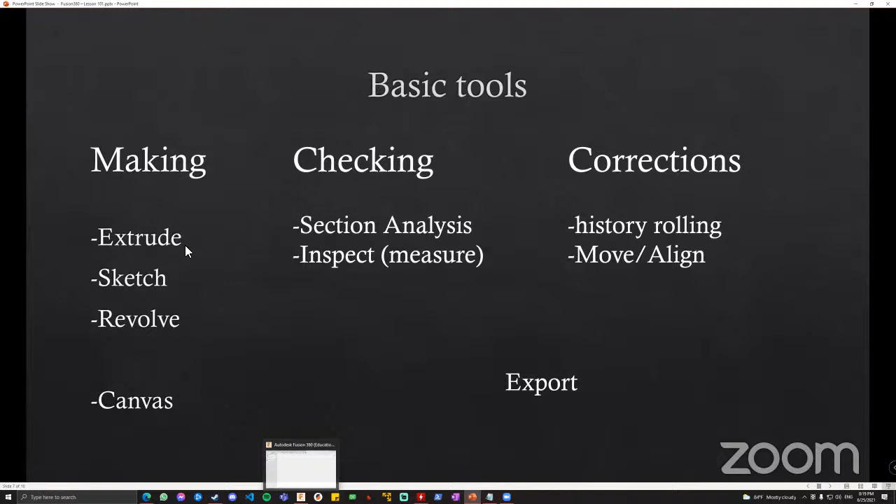A bit into the more practical side of the presentation, the basic tools. So for using Fusion 360, we have for the making part, the Extrude, the Sketch, and the Revolve.

Let me find, there we go. So you have the Extrude, the Sketch, and the Revolve, and we're going to look at all three of them. Sketch means you are making a two-dimensional design. And this is where it actually counts a lot if you've made your design on paper.

And I am actually going to download a design in a second. For this presentation, I'm going to present how to make a basic skeletal looking finger. And I just made some really simple sketches on paper. You might not even be able to understand what they're all about, but the only thing that really matters is that I understand them.

Let's see, we have to find a canvas. And this is the side note of making: use plenty of canvases. If you have drawing on paper, you can put the drawing in here as well. You can insert them from your computer, and I just downloaded this.

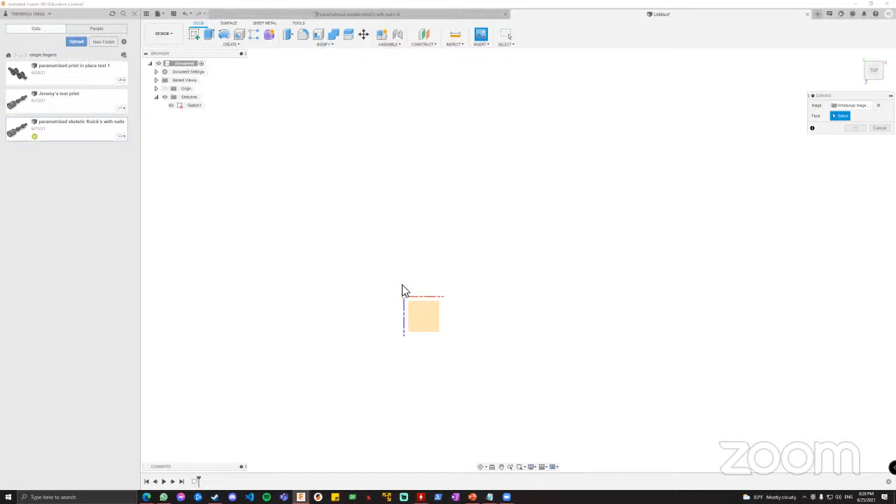Let's say I'm putting this on this face. And I need it to be 180 degrees, so it's face up.

Right, so on top of this canvas, we're gonna use the sketch environment. So to start the sketch environment, you can start it from here, or you can press L, which will automatically start the sketch environment, and it will ask you to select a plane where you want to sketch your things. And if you're using L, it will automatically select the line tool.

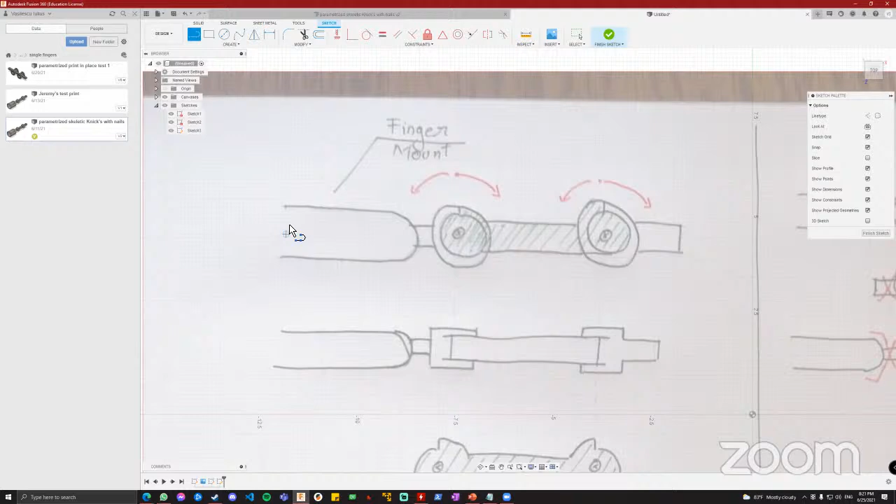Now, there are a bunch of tools over here, and I really encourage you to explore all of them. Some of them are advanced, some of them are not. In our case, we're not going to be using this picture right here. We just want to create a very simple rectangle. We're going to click Finish Sketch, and that's the sketch so far.

Now, in order to make this a three-dimensional object, we're going to click on Extrude. And then we can pull on the arrow to make it as big as we want. You can also type in here the exact measurements that you would like for your thing.

And with Control Z, you can undo the last movement, and you can undo all of the movements that you've made so far. And that is the extrude and the sketch command. With the extrude and the sketch, in the beginning, you will probably be able to make about 90% of your designs easily. Now, the revolve command is functioning.

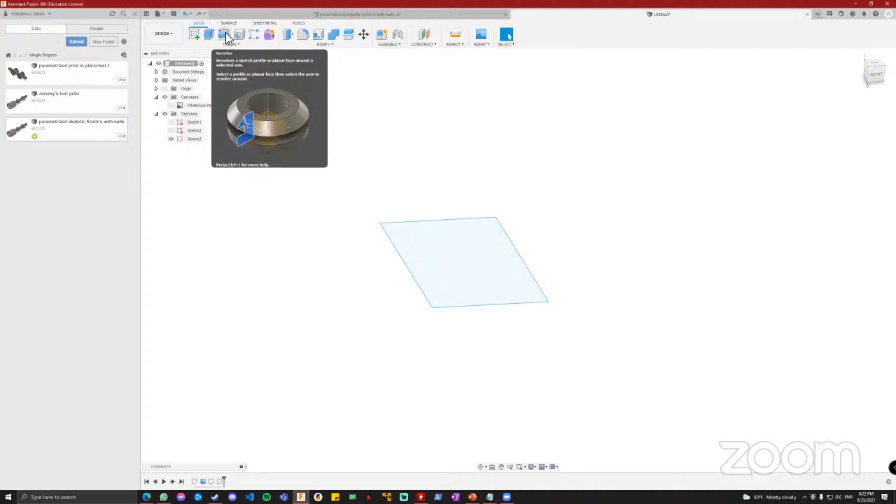It's very similar to the extrude in the sense that it does extrude, but it does require an axis of rotation. And here, for example, I have selected this rectangle with the revolve command, and I'm going to select as the axis this line right here. And as you can see, it rotates the entire profile 360 degrees. Now, if I don't want the full rotation, I can also select a specific angle that I want this at.

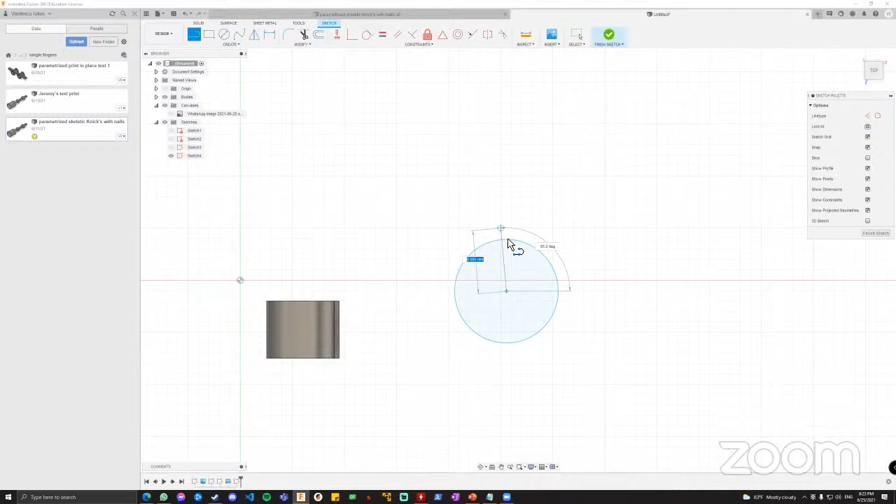Let's say I want to make a Pac-Man right here. If, for example, you want to make a sphere, you would have to draw a circle and then draw its diameter so that you can revolve one side of the circle around the diameter 360 degrees, like so. And now you have a three-dimensional Pac-Man.

Those are your basic tools, and I will be showcasing them a bit more in a minute when we're actually going to have a proper demo for the skeletal finger.

Now for the checkup tools. Once you have finished your designs, you will want to make sure of how the design looks inside, and how the design might be measuring from one point to another.

In order to get the section analysis, which is really common to be requested in engineering, you would go to Inspect, then down here you have the section analysis, and select a plane. As you can see, it will cut all of the objects in the scene and show you the section view. You can also angle the section view, and use the arrows to move about.

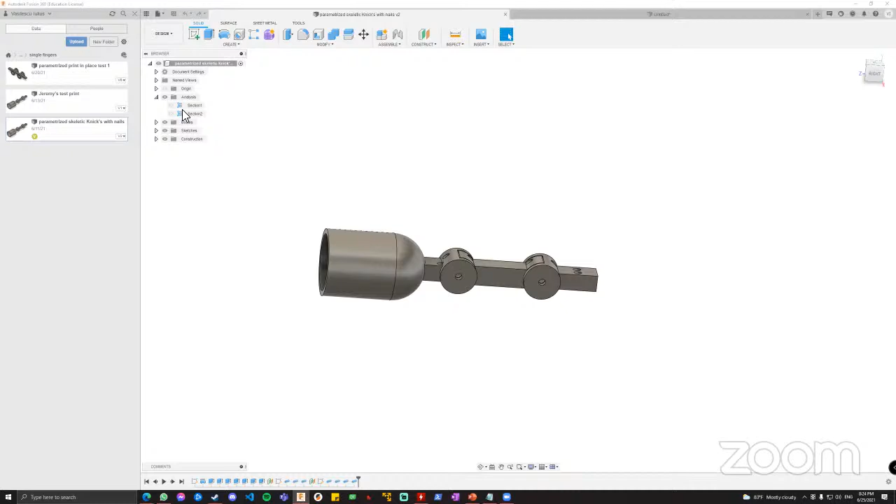This is really relevant where you have designs that intersect a lot of components. For example, on this finger that we're going to be building in a minute, I have this section view that shows how the components actually fit together, and you have different colors for each of the components.

Now, the other thing that's really useful for checking your design is the inspect functionality. You can turn off the analysis from over here. For the inspect functionality, you have this measure tool, which can also be called from the keyboard by pressing I.

You can select, let's say I want to see the diameter or the radius, so I click on the outside edge of the circle. That's going to give me the diameter, the radius, and anything else, including, for example, the length. I have no idea why it gives me the length.

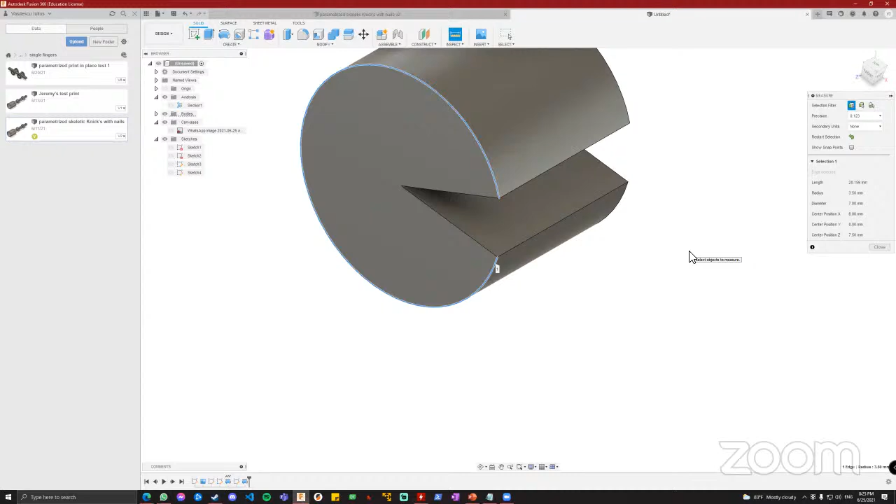If I want to see, for example, the distance from this side to this side, it has some visual feedback, and it will also show me selection 1 area, selection 2 area, and you have the distance and the angle between the two surfaces.

The measurement functionality has a bunch of different modes of operation. For example, you can select faces that are not exactly aligned, and you will get something like this. Or you can select faces and try to get the angle between two different faces, and there you go - you can see it's 40 degrees apparently. All kinds of stuff like that, which is really useful when you're trying to make something that you're 3D printing in the real world.

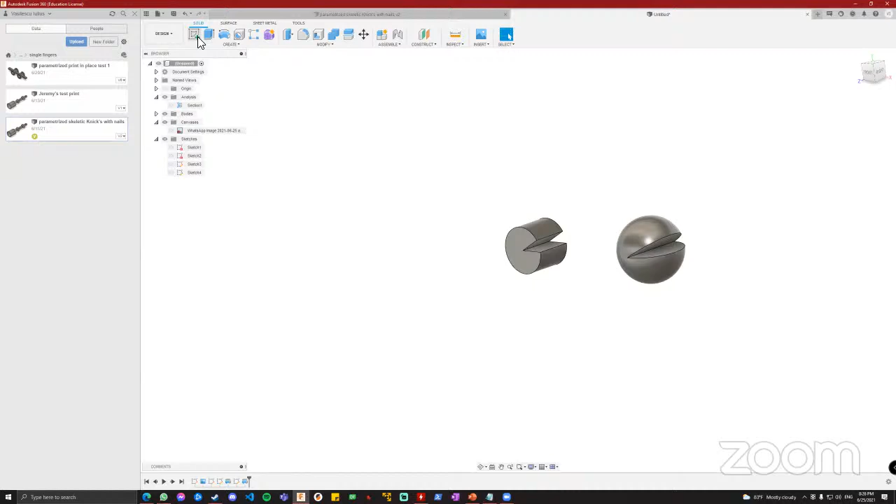Now, corrections. Let's say you have checked your design and something is bad with it. If you've noticed, for the time that we've played in here, there have been some small things popping up. This is called design history, and by default this is on in Fusion.

Now you can Control Z to remove some of them, but you can also roll back the history. For example, if I roll back the history, then I can edit this part, and it will automatically compute the entirety of the history.

This is not relevant in the beginning, but it will become relevant as you start gaining experience and you start making objects based on other objects.

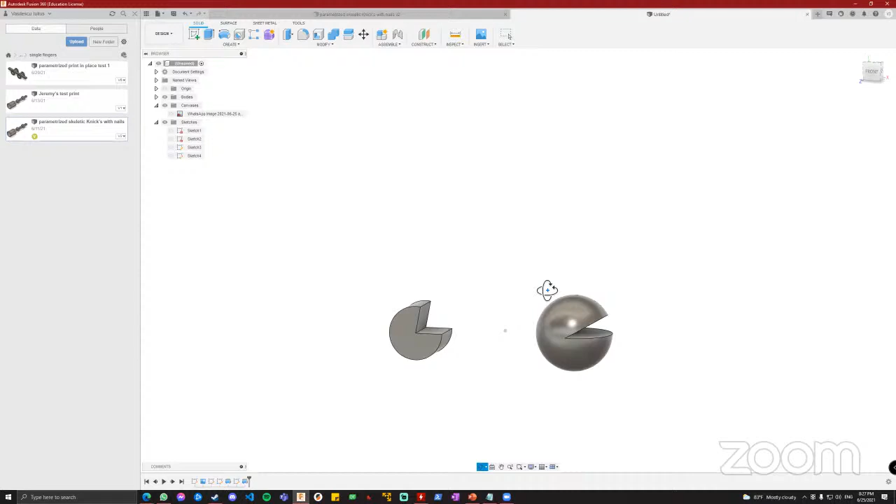Another important feature is you can double click a sketch from the list of sketches in order to edit it, and it will also jump the design history to that point. So for example, if we want to edit this one, we don't have to go all the way back - we can also double click on it, and now we can start adjusting it.

For example, we can make it much longer and a bit more slim. If I click finish sketch, there you have it - it automatically applies the changes to the entire design history.

You can also make the bodies invisible. You can select which bodies are visible, and which sketches are visible. Really, you'll get to your own preferences in that part. Personally, I prefer to work with only one body and only one sketch at any given time, but I've seen people working with 50 sketches.

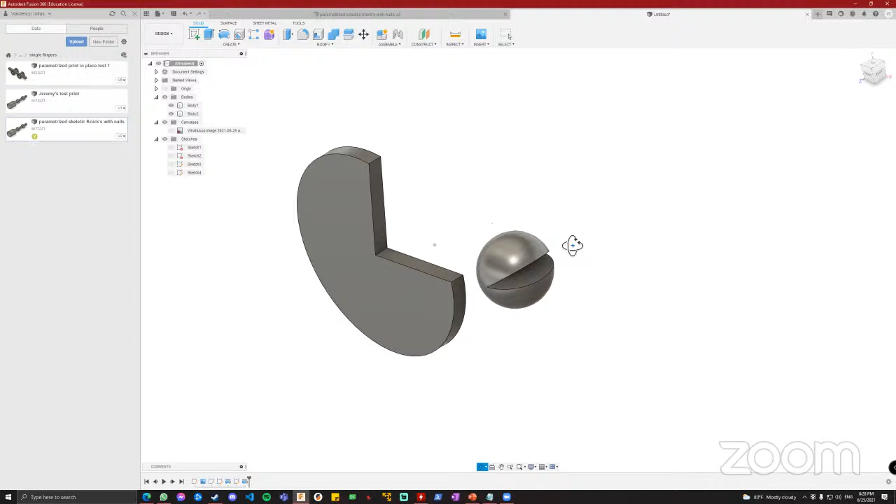Another type of correction is the movement and alignment. Now you might have two discs like this - so I hit E for extrude, and I'm going to make another body. Now I have two discs, but I want to have a small distance between them. I don't want them to be completely flush with each other.

So I can select the body, right click and move. I can also press M on the keyboard, and now I have the entire move functionality. This has a bunch of different modes of operation, and each of them has their own use case, but the default one is this one with the arrows and the angles.

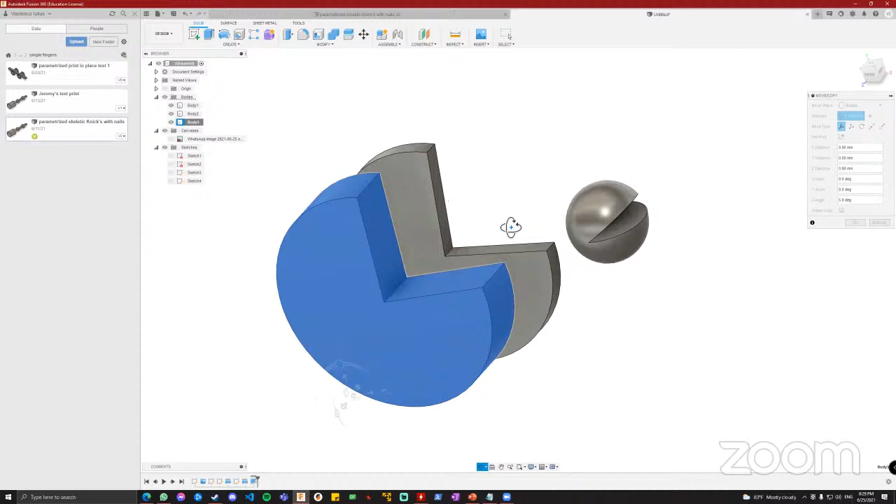Do keep in mind that when you're trying to angle something, it will angle it by this point. So if, for example, I'm selecting another point over here, it's going to rotate it about that point. For that, you have to select the very center of the body.

And you can also select stuff from a sketch - for example, I can also select this point, if I'm not mistaken, not even sure how to do that. If you find this menu to be too much, you can also select just the translation menu or just the rotation menu.

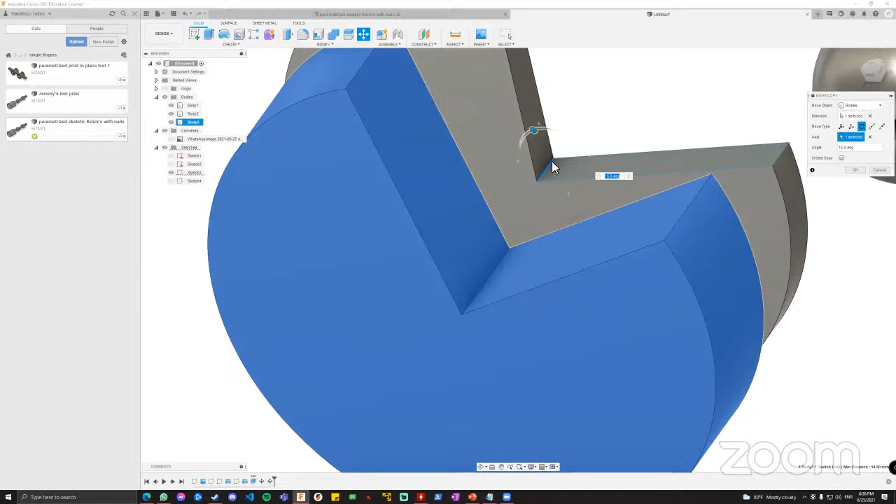For the rotation menu, it's not 3-axis, so it's not all 3 axes around the random given point. You have to select an axis of rotation, so this is for very specific rotations. There you have the axis of rotation from the previous sketch. The axis of rotation doesn't have to be from a sketch, it can also be from a given object, so it can also be this part. And now I'm rotating around its own center.

And that's pretty much all the basic tools that you're going to be using in your first probably 50 hours.

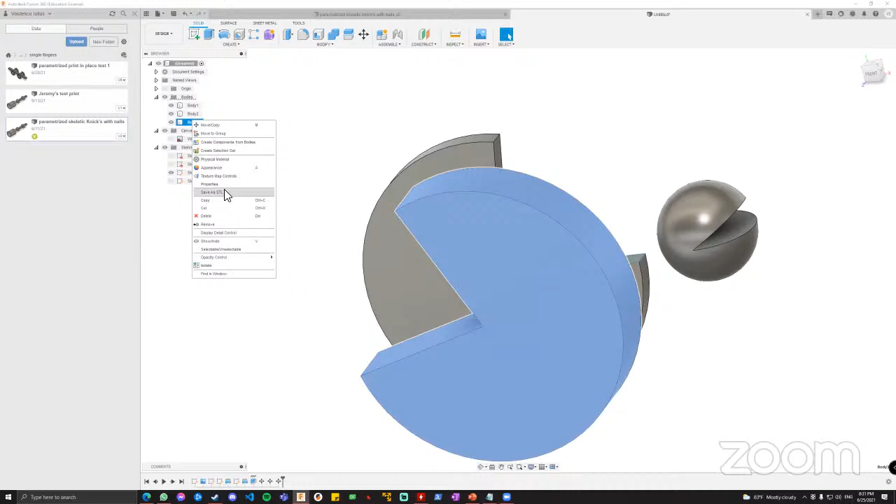The other thing that's important for using this in the e-NABLE community is how to export this to a 3D printer. Fusion 360 does have some embedded connections with Ultimaker, but personally I don't have Ultimaker, so I didn't bother with them. You can select one of the bodies, right-click on them, save as STL, and select your refinement from over here in case you want a custom refinement or want the file to be really small. It will ask you where you want to save the file, and from there you can directly import it into your preferred 3D printing environment.

So those are the basic tools. Now for a bit of a more proper demo, we're gonna be running on this depending on time. I can see I'm already halfway there, so we're probably not gonna be able to run through all of the approaches.

But we're gonna be redesigning this finger based on this canvas right here. To remove everything but the canvas, I'm gonna roll back the history, right click on it, and delete all features after the history marker.

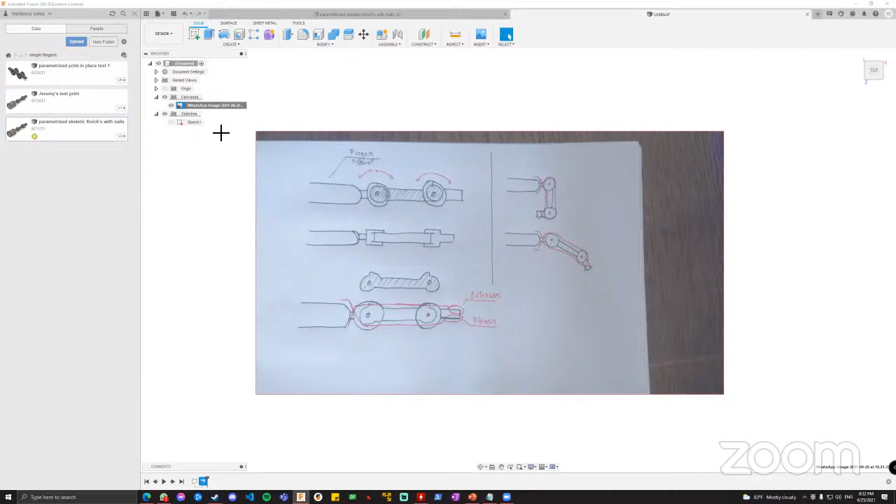In order to make the canvas millimetrically precise, you can right click on it and click calibrate. For example, I have the diameter of this hole about 3 millimeters. And now when you're doing sketches based on this, your entire thing will be scaled up.

A quick word about the most basic approaches for each skill set. At the beginner level, you can have lots of shapes and sketches, and all you care about in the beginning of using Fusion is getting the job done. You don't care how many shapes and sketches there are. Once you get more experience, you'll start wanting to use fewer sketches, because you'll want to edit those sketches in the timeline to edit the entire design.

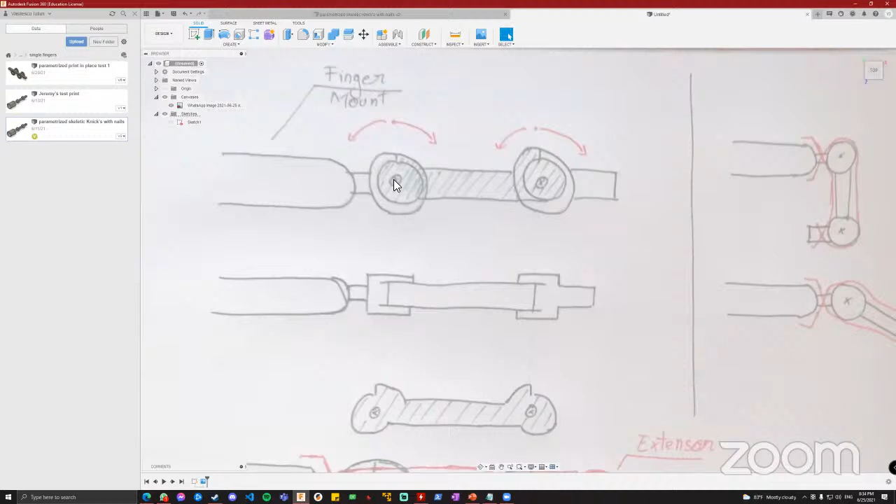On an expert or more advanced level, you would start using parametric designing, which basically means using parameters, predefined variables that you're going to be using in your designing. For example, I can have a parameter that specifies that all the holes in my design will be exactly 3 millimeters in diameter, and that's called a parameter.

Just to showcase it, I can click on modify, change parameters, and create exactly that variable, hole diameter, and set it to 3 millimeters. You can have however many parameters you want. You can also create these parameters afterwards, and you'll have to find them in the history in order to edit them.

Then you have the professional level, which is not just parametric design, it's also printer-friendly design. That's more regarding the actual manufacturing process.

So for everybody that's either on Zoom or on YouTube, which level do you want to see approached right now? For the people still watching, that is. You know, I'm interested in— oh, looks like we've got beginner. So absolute beginner. I'm also curious how it ties into the printers, that would probably be a discussion for where Jeremy could jump in, so maybe we can end with that. That would be wonderful, to maybe even just walk through it. Looks like Susanna is asking about amateur. So is it possible to maybe give us a little tour?

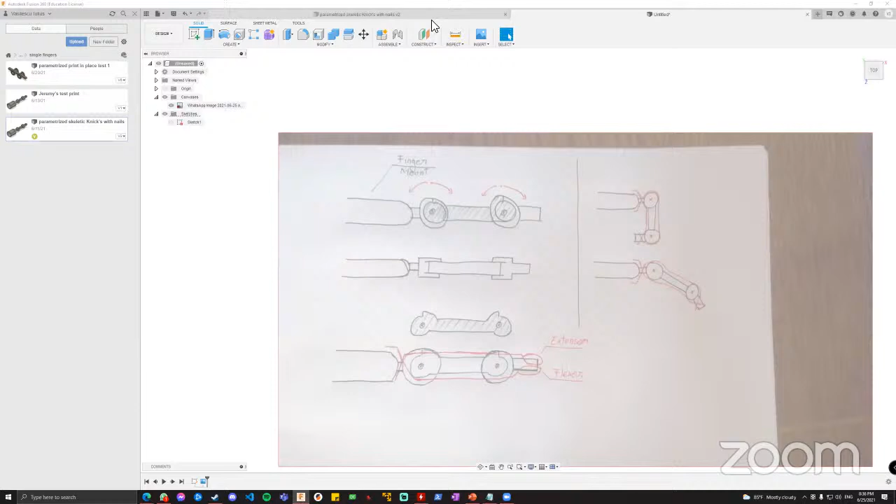We have this finger, and I have it in real life beside me because I made a bunch of models of this. This is an actual finger that we're currently developing with the e-NABLE collaborative team. Granted, not this one—this one has way too many holes.

So in my imagination, and as you can see on the sketches here, we can have three objects: the finger mount, which is this part; then the middle phalanx, something like that; and then the tip. Theoretically, from what I thought, you can have the wires connected from the first body going through the second body and tying off on the end. We're not going to care about the wires right now—we only care about making the bodies first, because the wires can be added later.

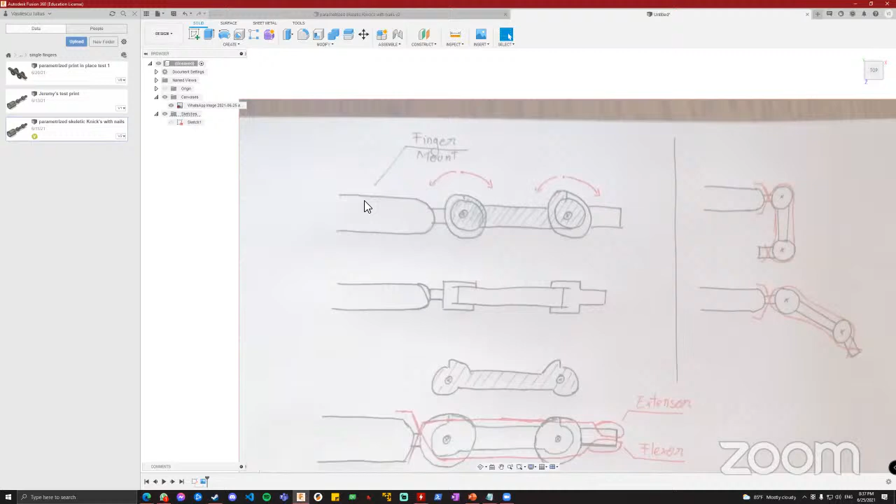So in order to have a finger mount right here, the way I thought it was, firstly creating a sketch over here, creating a massive axis so that everything will be symmetrical on this axis.

Now we're gonna have a bunch of lines over here with, let's say, 2 millimeters of width. And then a bunch more lines over here. That's the basic finger holder. We're going to revolve this around this axis, and now you have something to put your finger in, which sounds terribly wrong.

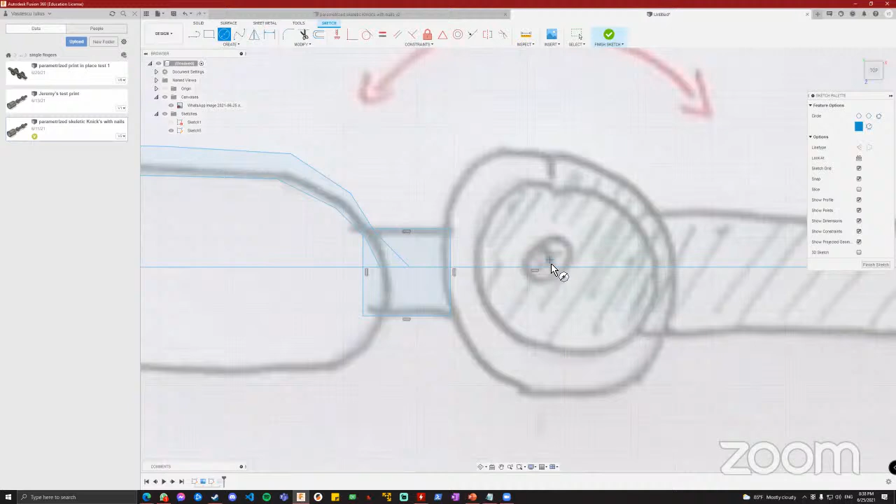We're going to go ahead and edit the sketch from over here, simply because we could create another sketch, but there's no point in it right now. And for the connection right here, we're going to use a rectangle. The hotkey on the keyboard is R, and the hotkey for a circle is C, which you can also see right here. Let's say it's somewhere over here. We want to use that parameter.

So we're going to start typing 'hole,' and there you have it, hole diameter, and hit enter. As you can see, it's not a dimension, it's an fx. So that's a function. Functions can be a lot of things, but that's a topic for a more advanced session.

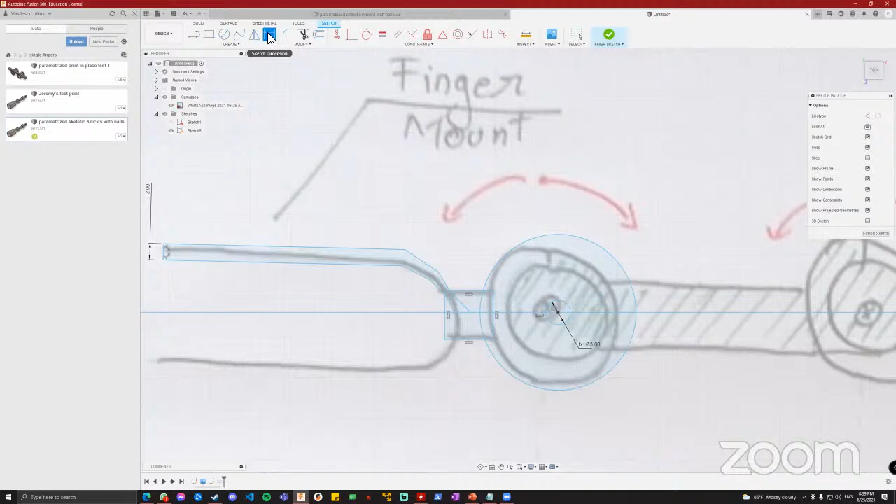Also, if you have a line that you would like to make smaller or bigger, you can either A, drag your points around, or B, hit D for dimension, which you have on the top right here, and put a dimension on it, and then you can write a different dimension. Do keep in mind that the blue lines can all be moved around.

However, let's see, the origin of the file is right here. So if we create a line right here, this is poorly defined, and you can see it as blue. If, however, we start defining things about it, for example, we can put a dimension on it. So that's exactly 17 centimeters.

And then we can put the other dimension on it, which is going to be 10 millimeters. Oh yeah, we're in millimeters, not centimeters. You can see the line just became black. That's because this is defined well enough that you cannot move the points around.

So Alexander, this is Connie. Sorry to interrupt. Do you always fully constrain your sketches, or do you leave them?

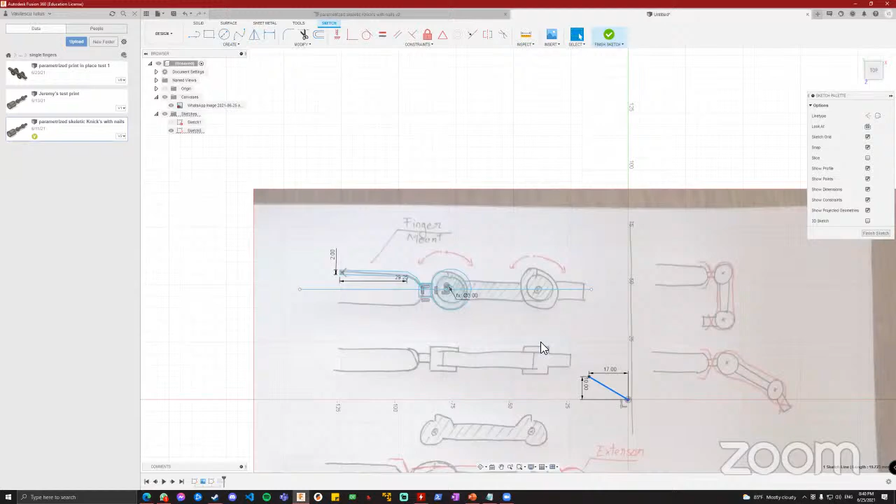If you have the time and the application, always try to fully constrain your designs. Okay, perfect, thanks. Something that's not constrained would mean that it can be moved around.

And when you start moving things around, when you have very complex sketches, see right here, I've moved the circle, but apparently the circle is constrained to the line, and now I've messed up the entire design. That's why you prefer to have these things constrained.

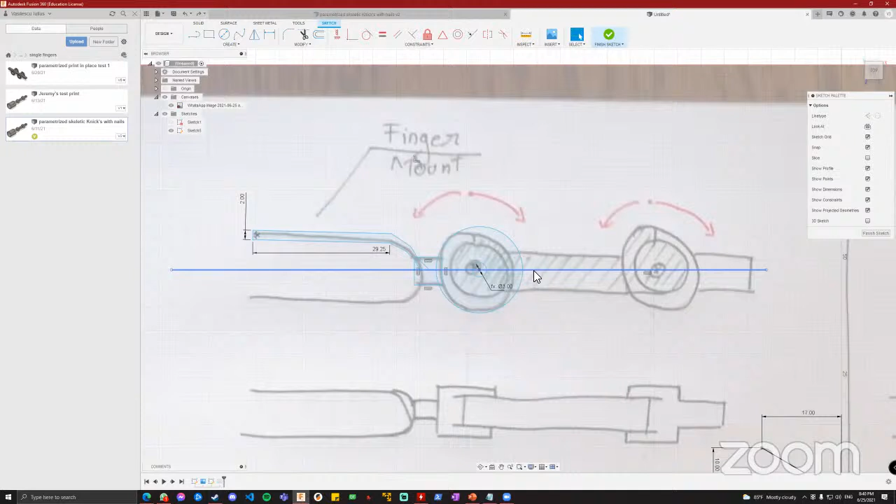There is also, for advanced users, you can select parts of the sketch and hit on this fix and unfix, and this becomes unmovable. It's very similar to having a constrained line. But again, that's for more advanced users.

Right, so we have the basic thing, we have the basic finger mount. If we select to view the old sketch and make this body completely invisible, we can select these things to go from left to right. We're going to select two sides.

We can actually select symmetric, so it's going to be exactly 5 millimeters on each, on both sides. We want to see this object. And when you see that the extrusion is red, it means it's set up to cut. If we hit enter, it's going to cut that profile into your old objects.

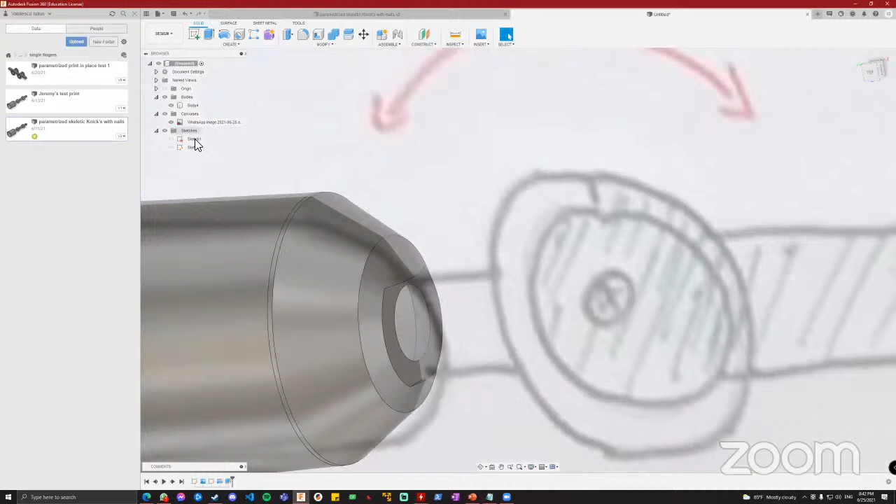As you can see, it literally cut the tip off right here. Now, if you want to edit that, double click on the extrusion in the timeline and we can select it to join. You can also select to make a new body or have just the intersection right here, which would be the tip. But for our purposes, we want this to be joined.

So now without the canvas, we have the finger mount and the connection. Going back to the sketch.

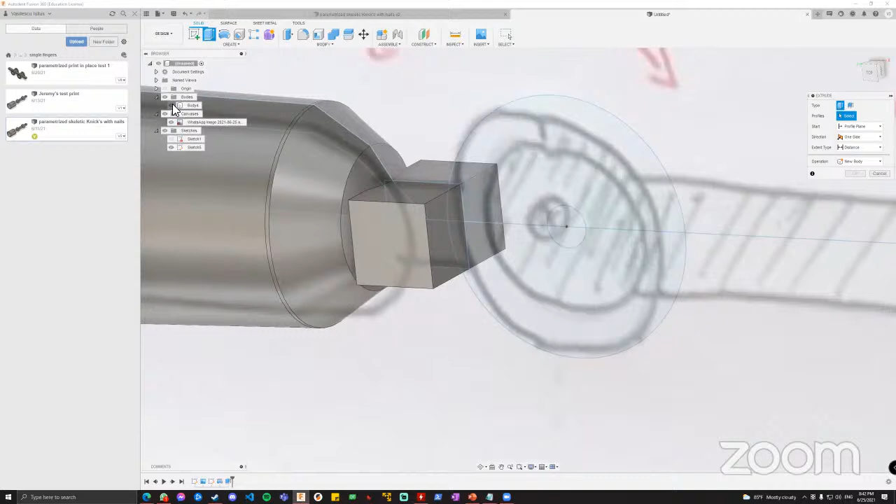We want these two planes. So we have this object and we have these two side parts of the joint, and we want to create those. Now we're going to use extrude again for this, but with an offset. I have my body right here and I have to guess pretty much the offset, because Fusion doesn't have a proper enough setting for this yet.

Let's say I want this to be joined and I want the offset to be 3 millimeters, so it's moving the entire thing in the direction of the extrusion. And since it's already offset by 3 millimeters, I want the actual extrusion to be 2 millimeters so that it's flush.

And you have half of it, and you can also do the other half. Now in order to do the other half, because I'm lazy and don't want to make another extrusion, I can also use mirror. Mirror, as the term says, will mirror whatever you select. You can mirror faces, bodies, features, or components.

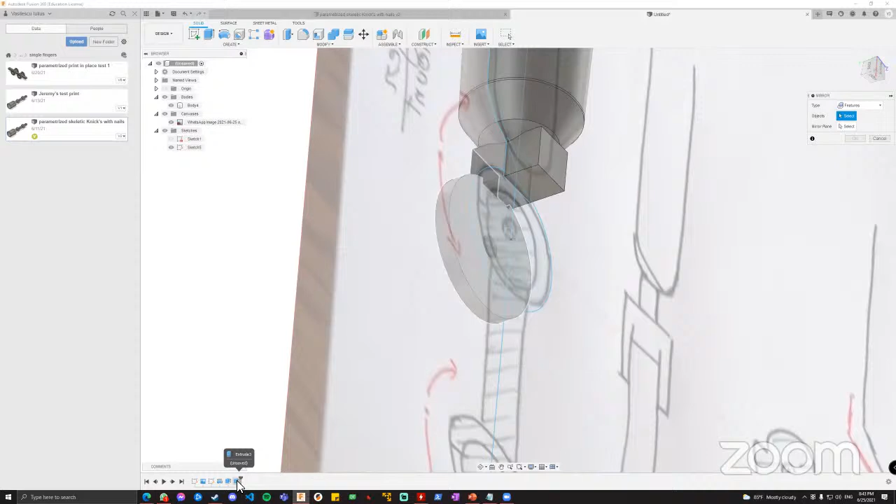Features are things that are right here in the timeline. I'm going to select features, and select the last extrusion. The mirror plane is going to be the sketch, so it's going to be this mirror plane. And the compute option, we don't really care about that.

So if we remove the canvas, there you have the joint connected to the first body. Now if we go back to the original sketch, this is rotated upside down. It does happen every now and again.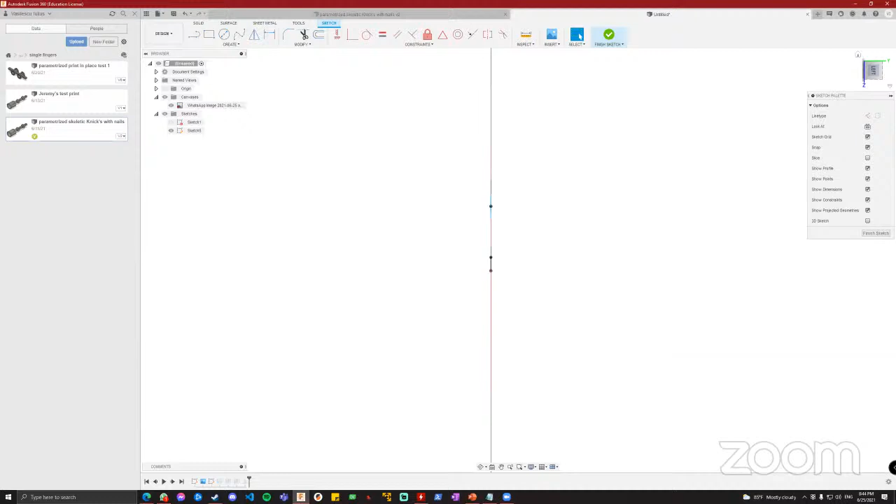Don't worry about it, you can use this cube to orient the entire design. Or if you want to spin everything around, you have to shift and middle click and drag the middle click around the screen to orient your view.

I'm going to go a bit faster right here, simply because we're going to be running out of time. So we have the connection. Then we have another joint right here with another hole. We're going to use the specified diameter, hit enter, and then we have the tip.

Finish the sketch. And now for the object that I have inside here, as you can see, I thought of it to be between the two planes. In order to do that, you can do really two things.

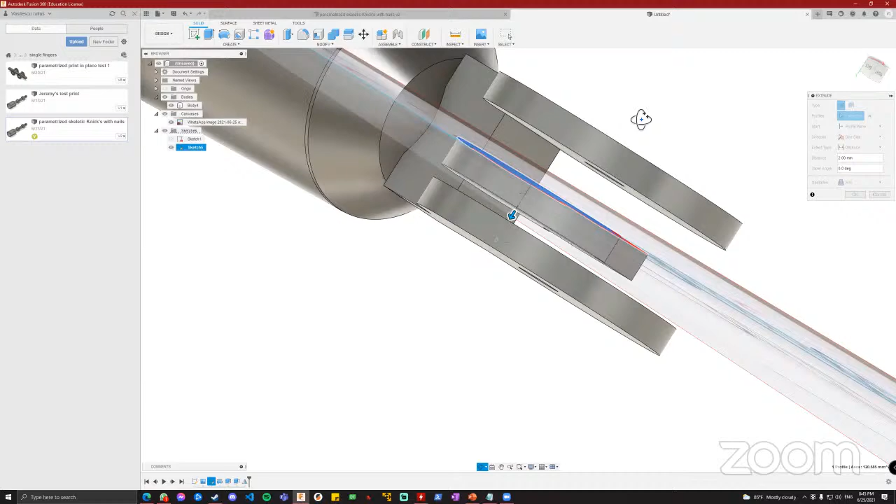You can either extrude this specifically to that destination, or you can start the extrusion and click on the plane that you want it to be towards. As you can see, it shows besides my mouse, snap to. By default, this is going to try to join it, but we are going to have a new body. There is a difference between new body and new component, but we're not going to go into that right now.

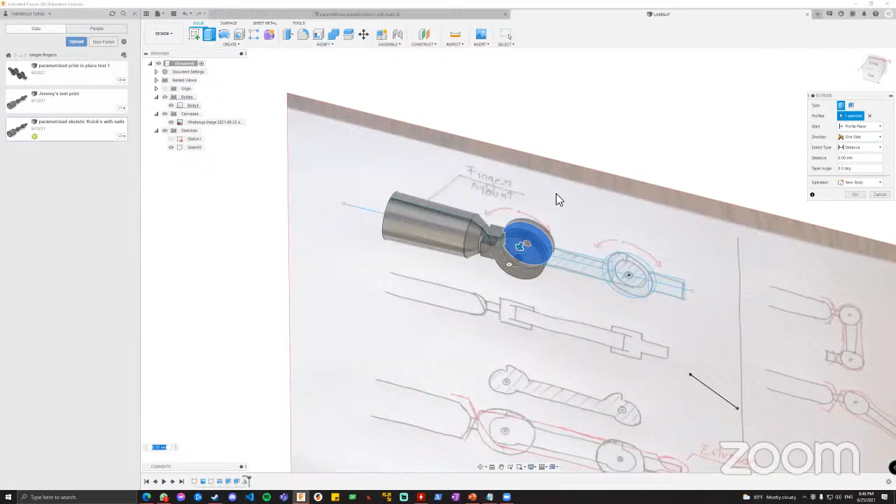And we don't want from the middle to this side. We will want from this side, new body, to this side. And again it automatically selects join. We're going to select new body again and be done with it. And now we have two bodies in here. If I make the first body invisible, you can see this is the second body.

We're going to go ahead and extrude this other thing symmetrically, and have the measurement up to this size so that it automatically snaps to the desired location without us having to figure out, oh wait, this was 3 millimeters or whatever. Right, and this is the second body.

Now for the third body, on the original design we have something that is very similar. So the third body is going to be on the outside planes again, and then with a sticking out little thing on the front. So we're going to make the sticking out bit first.

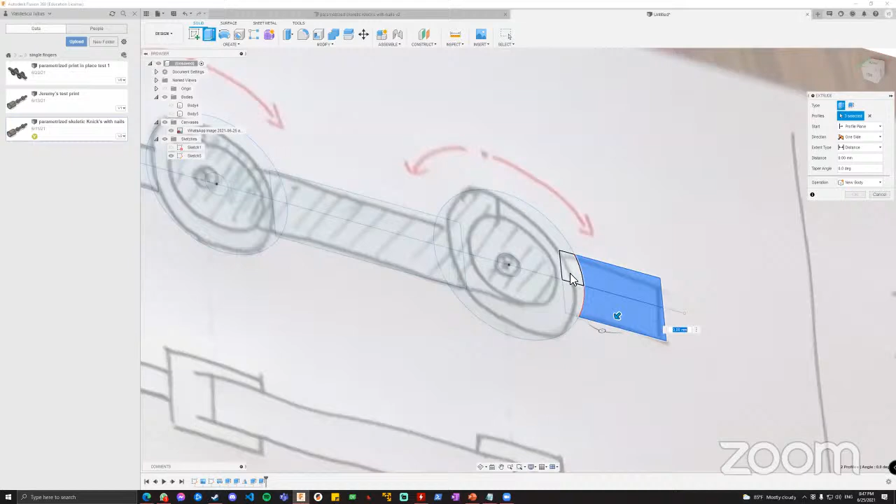Again symmetrically. We want to view the last object as an object of reference. And let's say it's going to be this big. And we're going to have a new body again. Now we have two things.

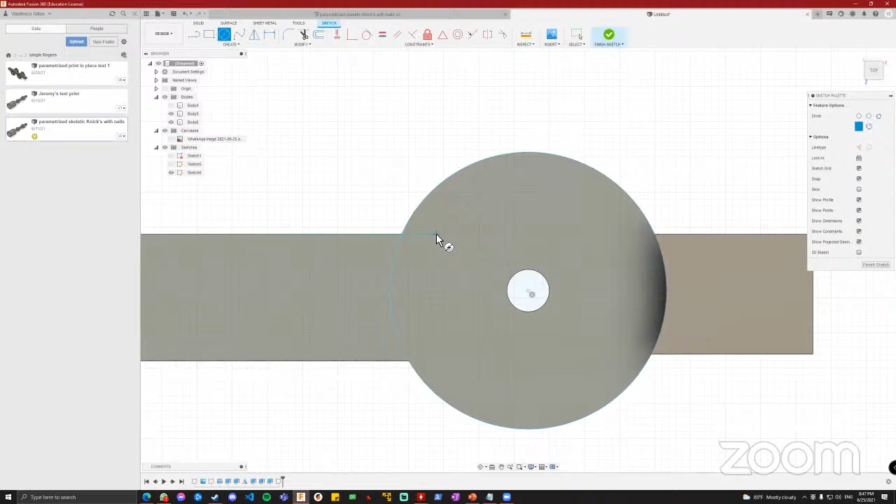We can either use the original sketch, or let's show you how to do a new sketch. We don't have the canvas, we have just these two bodies. We're going to hit L for line, which is automatically going to try to start a sketch. Hit on the side that we want to sketch about, and hit C for circle. And you have the circle of this surface right here.

Finish sketch. And now we can start extruding this and connecting this to the second body. This part is technically connected to body 2 and body 3, which are numbered as 5 and 6 for some reason. In order to connect it to just body 3, we can select unview to make the first body invisible, and now it will only connect to the second body. We're going to be doing the same on the other side.

Make the first body invisible and join with the second body. And there you have a very simple prototype of a finger.

We are probably going to be running out of time soon. So what questions do you have regarding the more advanced design?

Just keep in mind, Alexander, we had those technical difficulties and got a bit of a late start. So if we wanted to run to 10 or 15 after, I don't think that would be a problem. That's perfectly all right with me. There is the issue that using the beginner method of having lots of shapes and going really slow will probably not allow us to even finish this design.

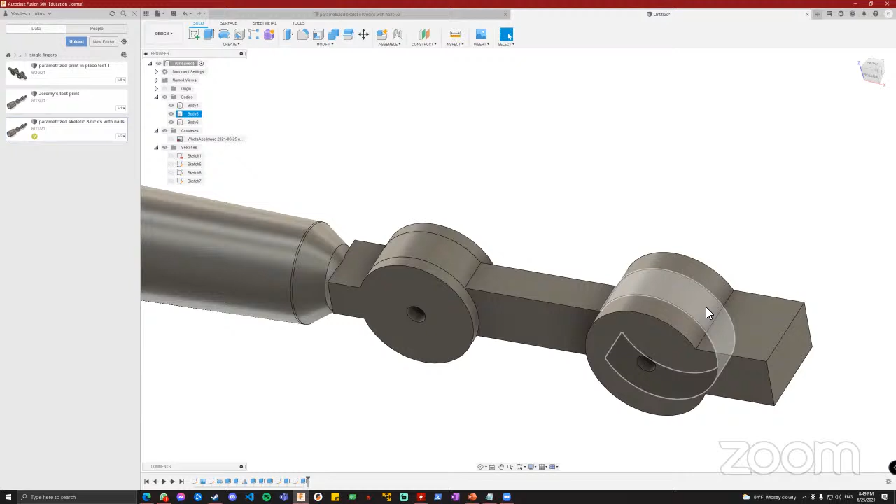Alex, I think it may be informative for you to just demonstrate the export of an STL file, just so people understand what the end game looks like. The other thing you might show is how you can manipulate the joints so they understand this is also a modeling and simulation environment.

All right, let's go first with the STL exporting. My preferred printer environment is Prusa Slicer, which is of course free. If we want to export these things, as you can see, there are 3 bodies right here, so we have to export each of them individually.

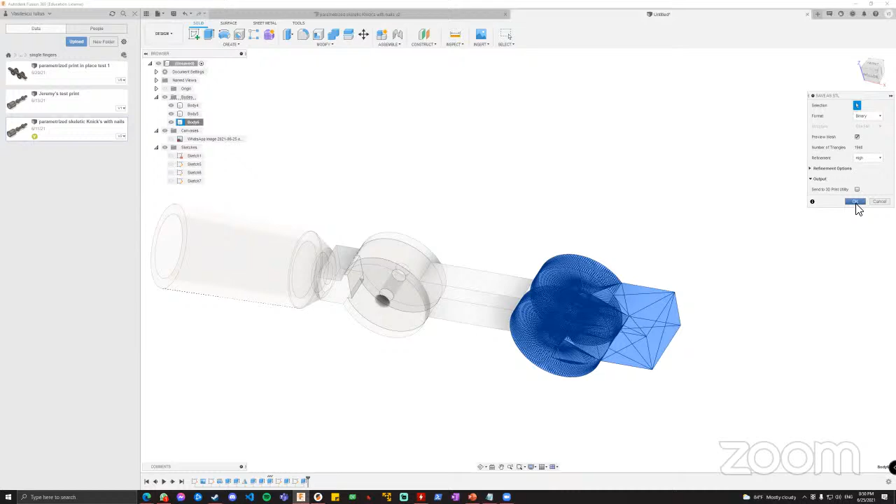Let's say I'm going to export all of them on the desktop. Right click on it, go to Save as STL, and then select your refinement and your format. If you don't know what those are, just leave them as they are by default, and hit OK.

And then you can go into your 3D printing environment, and you can select multiple bodies, and you have them on your build plate.

We should probably be making a tutorial on how to use various 3D printing software and the supports, but that's not part of today's workshop. Thank you.

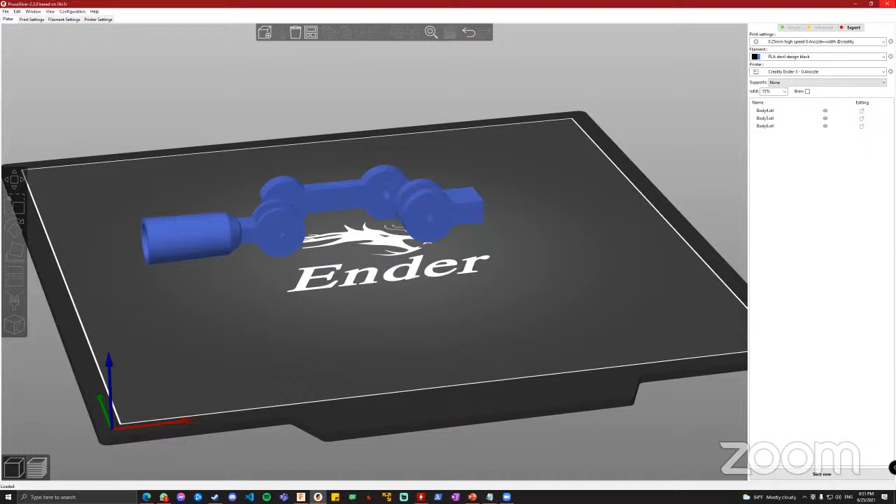All right, this is how you import them in your software. I'm going to close that. And the simulation part, which is really important, but I don't recommend it for beginners.

If you want to simulate something that is actually moving, there are a number of types of joints. In order to access a joint, you have to have Assemble and Joint. It's not going to let me do any joints because there are no components.

You need to create a component or convert existing bodies to components. There are a number of differences between bodies and components. Probably the biggest one is that components can contain bodies. If you don't want to bother with that, right click, create components from bodies, and it will automatically create a component for each body. A single component can contain a number of different bodies and joints. A component is like a different design file, essentially.

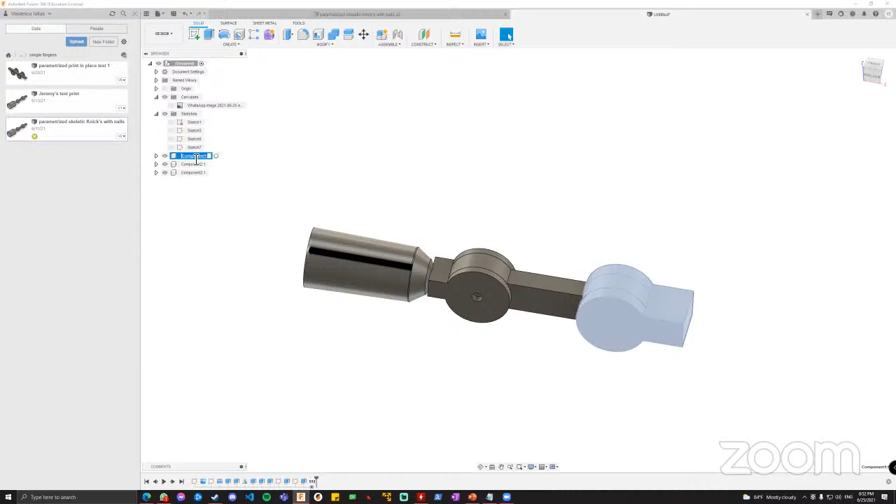Once we've created the components, we can also name them. If you have more than 3 or 4 components, I strongly recommend naming each of them. This is going to be the finger. And I'm going to have Assemble.

Joint will try to move the 2 components about, and you can also have As-Built Joint, which will not try to move the components about - I'll showcase that in a bit. Let's see, I have to select the first component. Okay, I'm going to select this body.

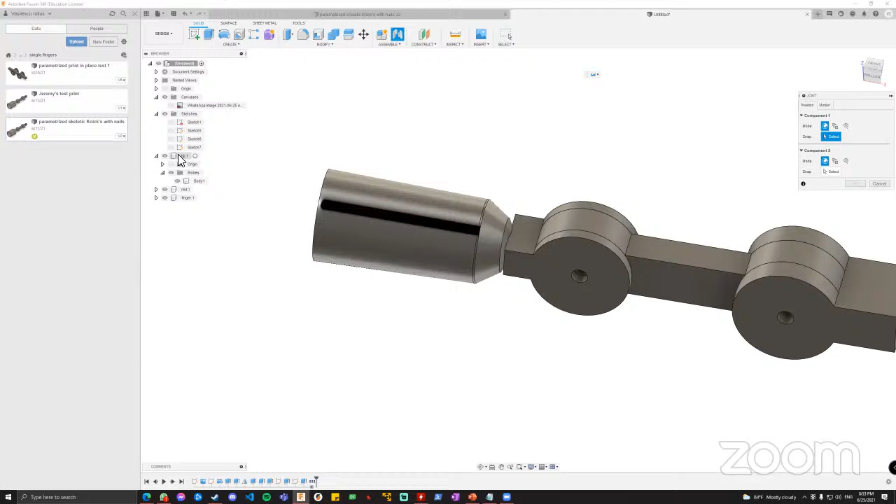Let's say for now that you can also select a face, and we want a rotational joint between these 2 bodies. So we're going to select this point of rotation. You can see a small yellow thing that tries to snap around as I move my mouse around.

If you click once, you select the body that axis was part of, and then you have to select the slave. So the first component is going to be the master, and the second is going to be the slave, meaning the first component moves in relationship to the second - an important distinction when you want to derive movement all over the finger.

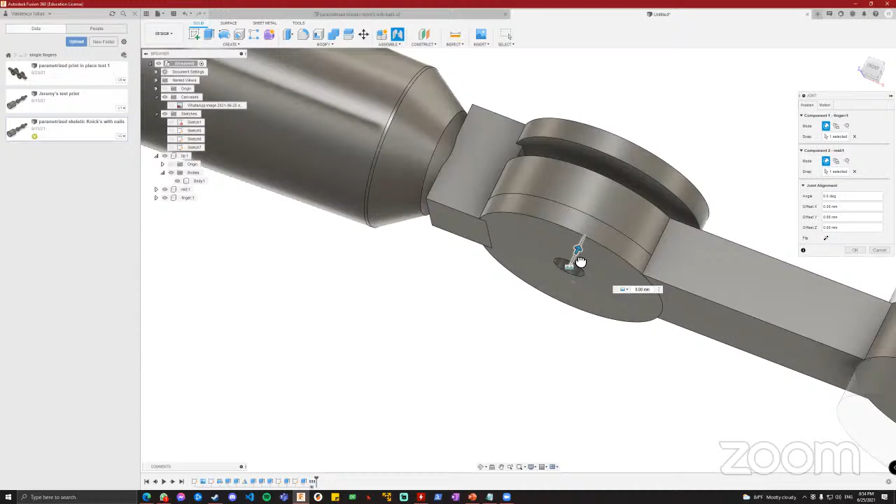As you can see, by default it tries to move the 2 spots so that they touch each other. So we have to move it back, and we have to select the type of motion, which is going to be a revolute joint. Once you select revolute, you can also hit animate, and you can probably figure out if you've done a proper job selecting the joint or not from this animation.

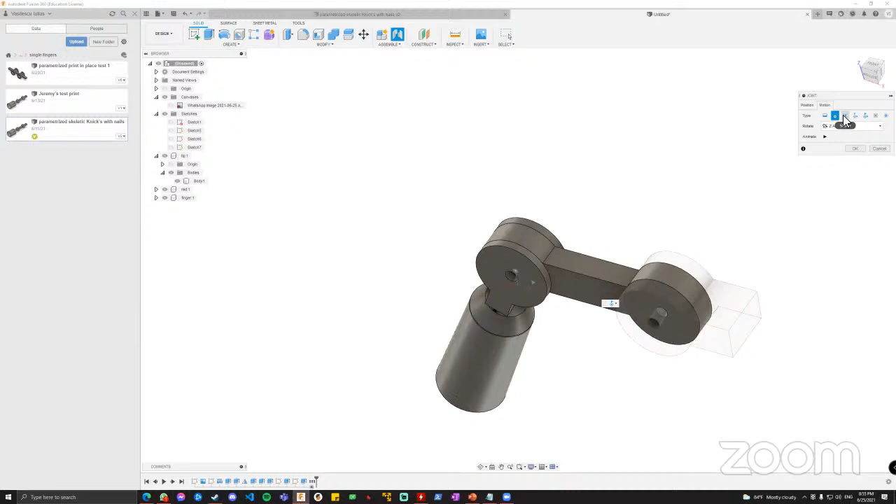There are 7 types of joints, but probably you also have some joints that are a combination of them. You have the rigid joint, which means the 2 bodies are separated in files, however they act as one. You have the revolute joint. You have the slider joint, for which you select an axis on which the first object moves around - you can also select the sliding axis from over here.

So if I select the x-axis, we have this snapping point right here. And when it's animating, it goes front and back. You can have cylindrical, which is how

a screw moves. You can have the pin slot, which is a pin in a slot, but it's harder to demonstrate right now. You can also have the planar, which means it can move in 2 directions however it likes. You can have the normal right here and the slide, and it allows rotation in that specific plane. And you can have the ball joint, which is two revolute joints connected.

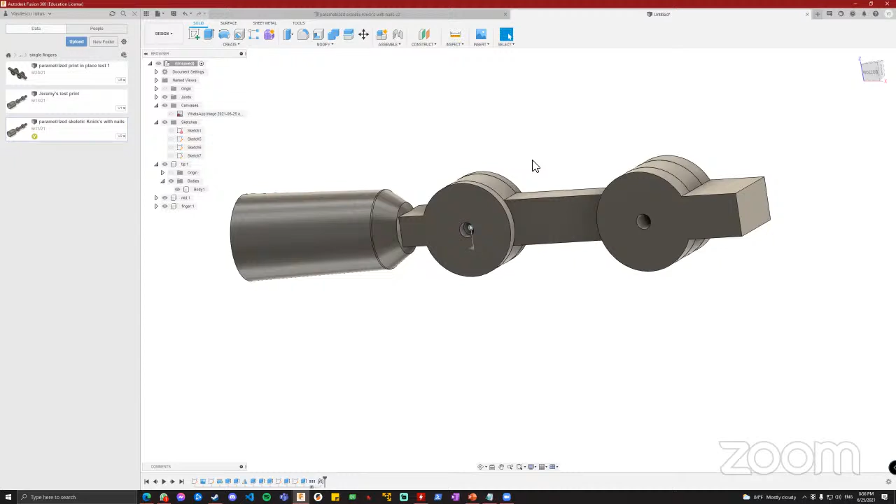For our case, we're just going to be using a simple revolute right here. And we're going to press J for another joint. Have the second body be invisible. Select this point right here as the snapping point. Make the second body visible again. And now I can select this point as well. And this way it won't be moving around because the two snapping points are on top of each other.

By default, the joint selects the last motion, but you can also select a different motion easily. You can also have various offsets. For example, for revolute, if I select this offset, it's going to move like so. I don't really recommend tinkering with offsets if you don't know exactly what you're doing.

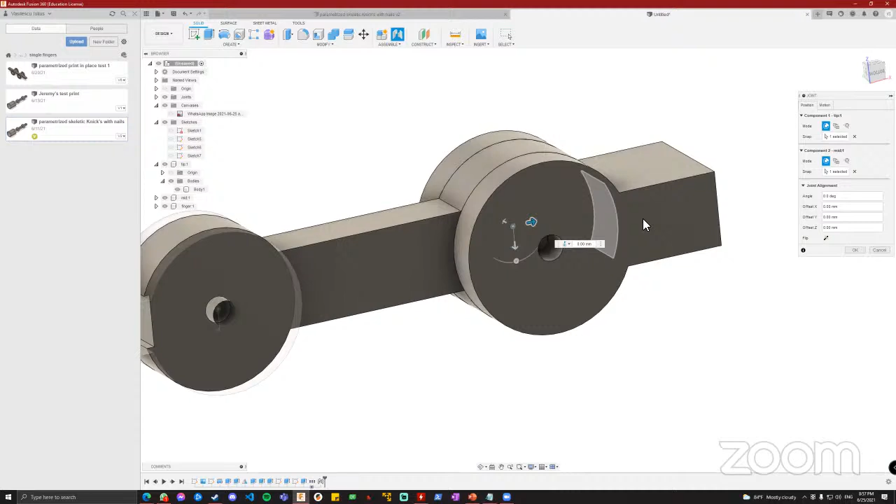And these are the joints. Now, where the heck are they? They are right here in the design history, and they will be creating a new folder right here called Joints, and you have Rev1 and Rev2. And it also shows the exact angle.

Now, if you double click on one of them, you can highlight it in the environment. And if you right click on it, you can drive the joint manually. So for example, I want to move it exactly 90 degrees this way. And if I hit enter, I also have to hit capture position. So that is now how the computer sees the design. This is no longer an animation.

I can actually create a sketch from this point to anywhere else.

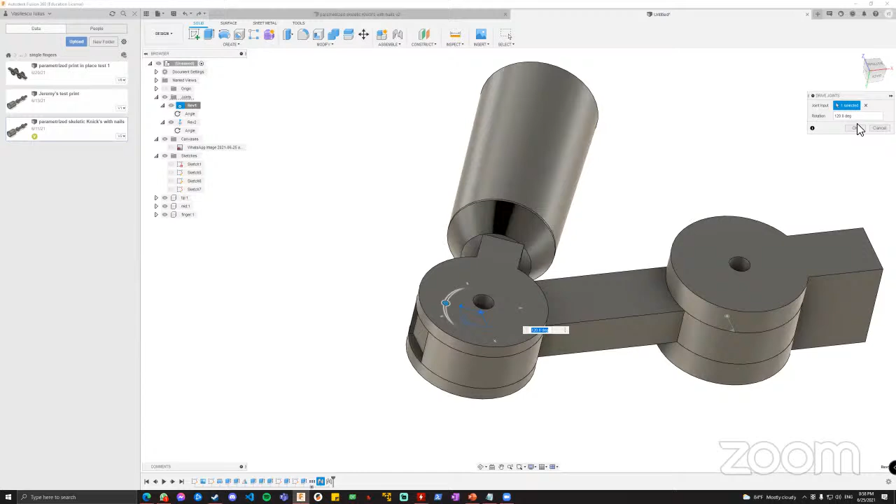Otherwise, if I don't capture the design, let's say I am driving the joint again, hit OK. And now that I'm trying to hit L and making a sketch, it asks me, do you want to capture the current position or not? If you hit continue, it's going to rotate to the previous position.

In order to test if the things move smoothly, so a proper contact simulation, you can hit on assemble, enable all contact. And now I can also use the drive joint command. And it doesn't want to move because the two objects are intersecting.

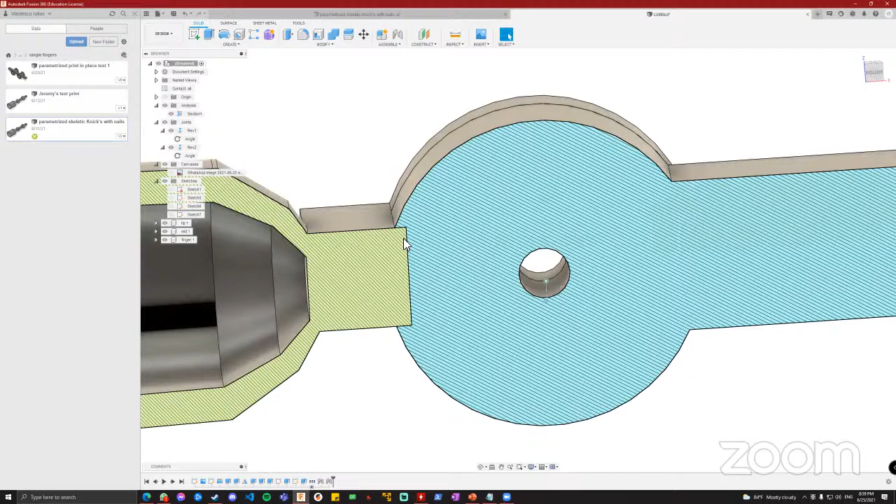If I try, the two objects are intersecting in, we're going to make a section analysis. There we go. The two objects, oh, they're not intersecting actually. And this is why a section analysis is useful. They actually have no place to move because of this little square thing. So that's going to stop everything from moving.

I'm going to cancel the analysis and try to make this other joint move. Double click on the marker or on the general view, and you're automatically going to get into the drive joint. And now I can actually move the joint until it hits that other object. And that's how you can very roughly simulate contacts. As you can see, it doesn't go quite all the way because of how the engine is designed, but it's more than enough for most of your simulation cases.

If you want, for example, we're using wires in the finger, so we might want the two joints to be connected to each other, so that if this joint moves 90 degrees, I want this joint to also be moving 90 degrees. We're going to disable the contact. Well actually, no, we're going to have enable all contact, and we want to edit that little thing that stops us from moving. Now that little thing is part of this.

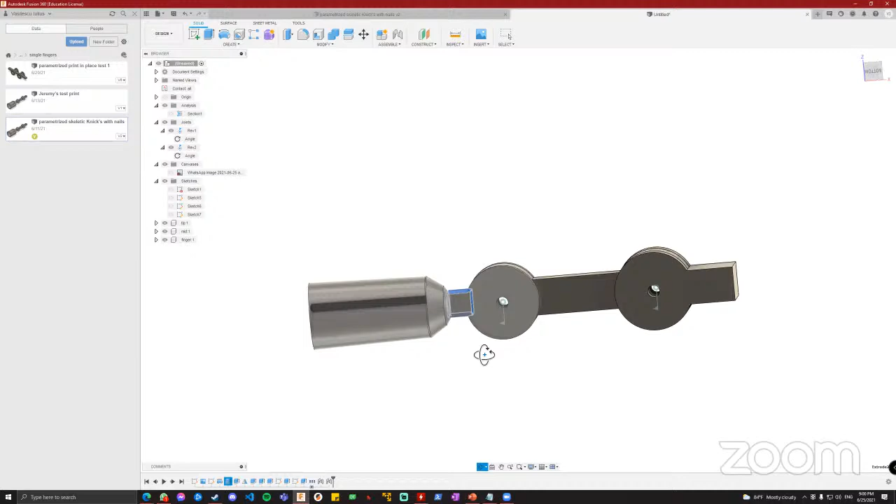In order to find something in the design history that you're not sure which extrusion it was, simply click on it and it's going to highlight the object that it modified. So the last extrusion, for example, was this one. If we modify the second extrusion right here,

it needs to be without this part of the circle so that they no longer intersect. And let's check that it actually did what we wanted through the analysis. And yes, they no longer intersect. They are just flush with each other. So technically, I should be able to drive the joint around. And there you go, we can drive the joint around.

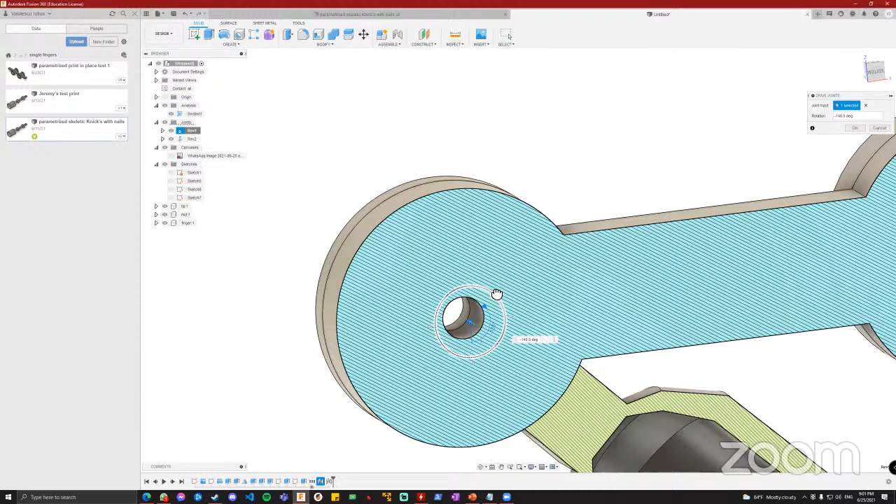If you want to connect these two joints to move together at the same pace, you can have a motion link, where you're going to have to select the two joints, and you can have the normal rotation or the reverse rotation.

You can also select a specific type of ratio from over here. So you have, let's say 180 degrees to 360. So one of them will be moving at double the time.

Now, let's say we don't feel like moving them manually. We can also hit animate joint, which will only animate the joint. If we go with animate the model, it will animate the entirety of the model.

In order to not get this error where things are starting to pop off everywhere, we can either disable all contact and animate the model again. And as you can see, it's a 1:2 ratio with a reverse rotation on the second joint.

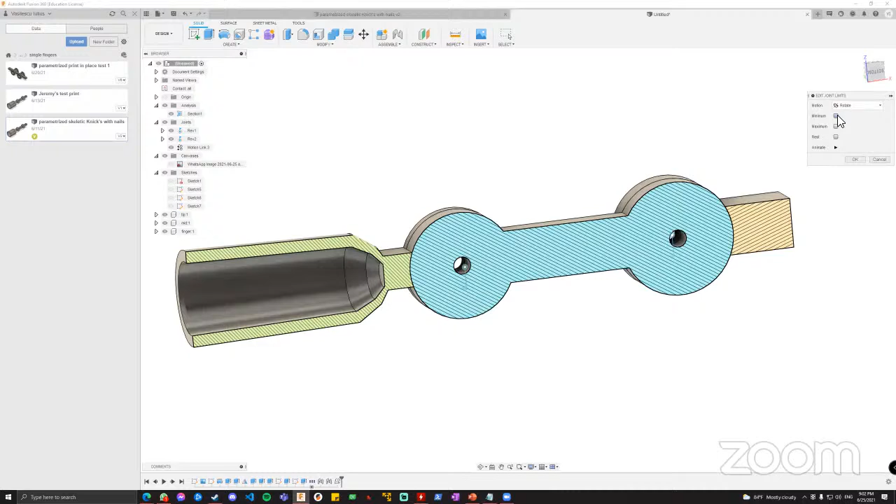Or we can still have the contact and start getting joint limits. So each joint can have a minimum and a maximum and the resting position. If you feel like declaring them as degrees, you can go through this menu. If not, you can just drag these things along right here.

And now if I try to animate just the joint, not the entire model, it's gonna go to those limits. And those limits don't have to be the physical contact limits. They can be much smaller. So for example, I want this part to only be moving about this much. And it's only moving that much.

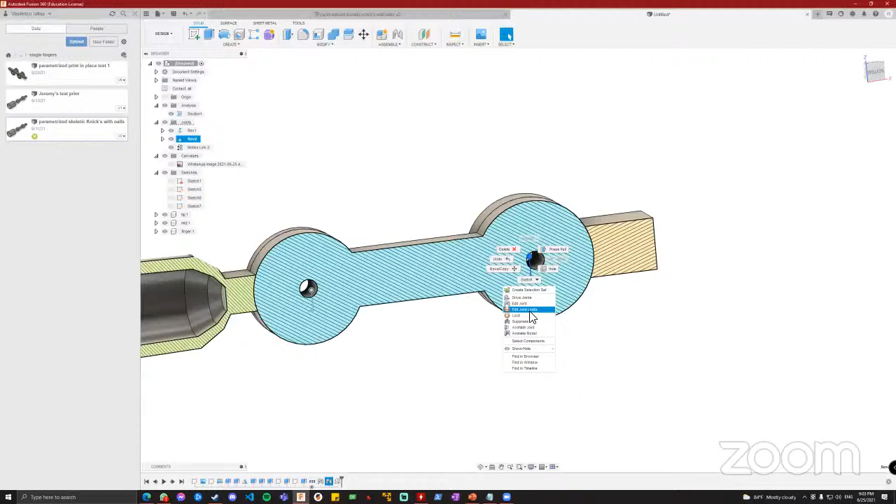I can also select some, I can also right click directly in the view here and have the joint limits, minimum, maximum, and let's say I want 30 degrees in each direction. The minimum always has to be smaller than the maximum. And if I hit animate, there you have the movement.

So let's try to simulate the entire model now. Of course, it cracks because this is supposed to move 2 times faster than this one. So I have to edit this to be at the very least more than 15 degrees, let's say 25 degrees.

There is a separate issue. The range of motion of this one, because of the motion link, has to be smaller than the second one. So for example, 10 degrees on each side.

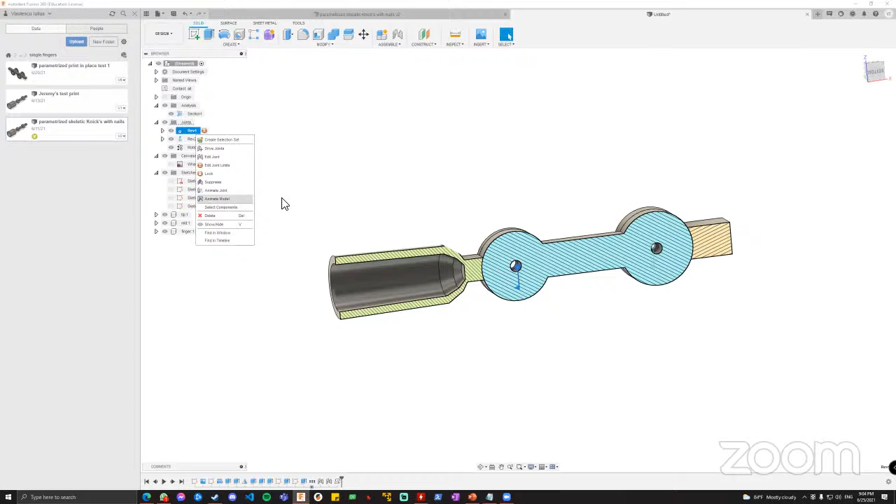And as you can see, it barely flops around, but it does flop around with only one movement. And we do know that the movement is possible because of enabling all contact. It is also written over here. You can also use contact sets between different bodies so that it's not trying to compute between 1,000 bodies. But again, that's only the case for very, very complicated designs.

Any other major questions, either from YouTube or the Zoom chat?

No, nothing? Alexander, I'm curious about, this is Ben. I'm curious about preparing a file for printing, about your process. So maybe you can talk briefly about taking something like this and preparing it for the printer.

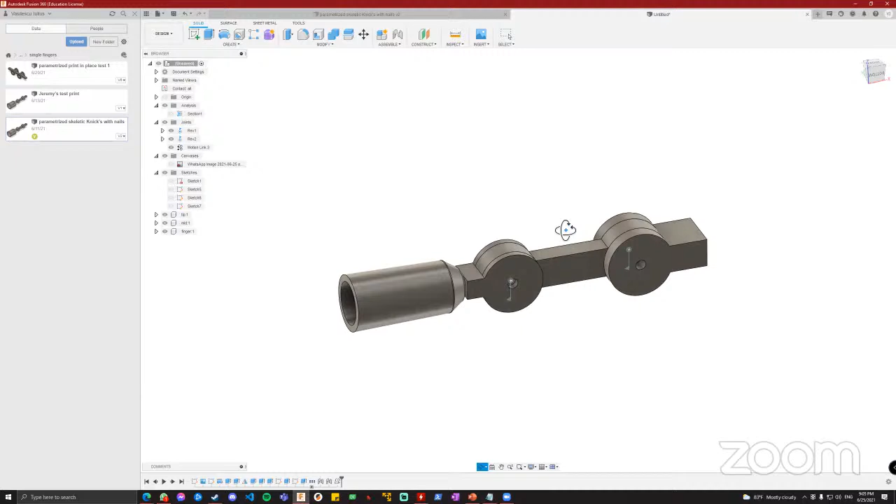Well, to prepare something like this for the printer, there are 2 major ways. Number one, you can go directly in your printer environment and start putting supports everywhere. Or number 2, you can start thinking about how to make the printer's life easier. Basically, the printer is a very, very patient kid with a glue gun, putting layers upon layers of glue.

Now, for example, in here, when you're putting layers upon layers of glue, here you're going to be putting hot glue in midair. So that might be a bit rougher. That in 3D printing, that's called the bridge. This bridge over this gap is not big. However, this bridge over this gap is quite ginormous.

If I'm not mistaken, I'm going to hit measure. And on this line, it's 20 millimeters, which is probably at the best case scenario for my 3D printer. So we either put supports under this, or we figure out how to make the printer's life easier. And there are a number of ways.

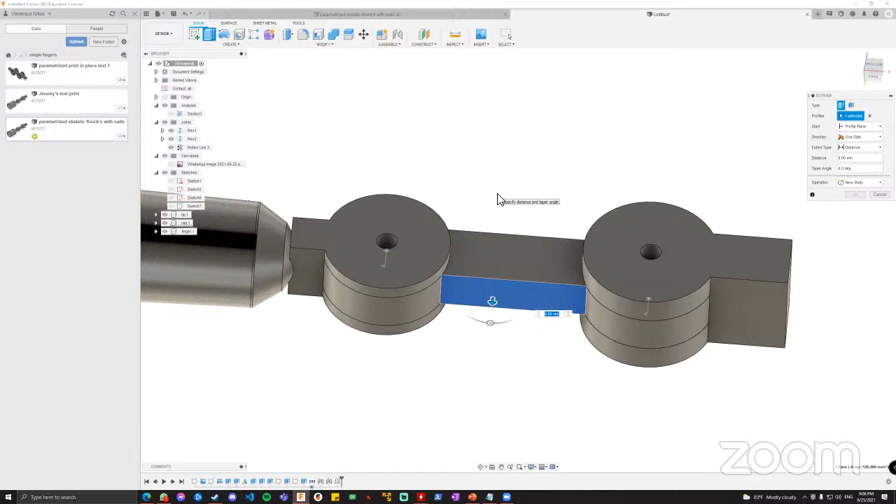My preferred way, for example, is thinking, how can I print this? So I have just one object. How can I print this without having any bridges? And the easy answer is just print it on this side instead of this side.

If that is not a possibility, for example, with this part, we can print it on the sides, but we would have this entire thing in midair. There are two kinds of bridges. There are bridges that are supported on one side and bridges that are supported on two sides.

If you have bridges that are supported on two sides like this one, that means the biggest droop is going to be in the middle. And after that, the line is going to connect to the other supported side. And that's the better case of a bridge.

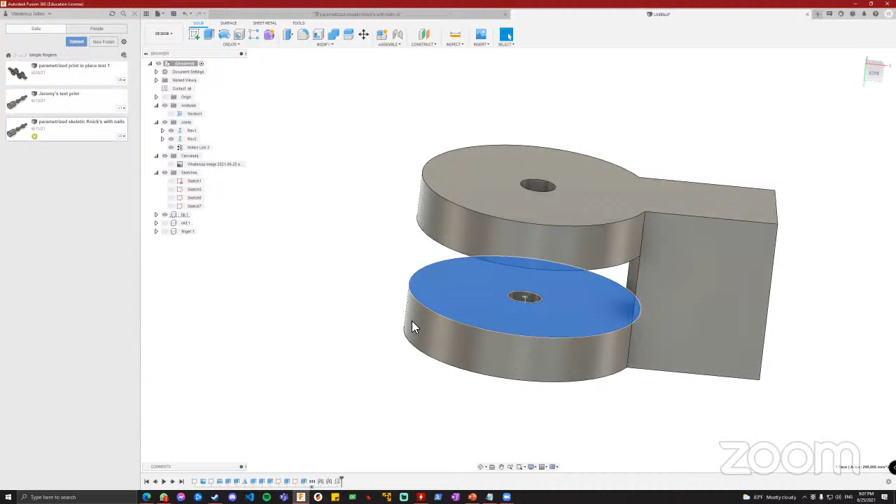If, however, you have bridges like this surface, where you have a side that's completely in the air, there is a good chance that this will completely droop over to another level. So all the way to this part, and the end result is going to be that this body is going to be completely unusable.

In order to make it more 3D printer friendly, we have to figure out a way for the 3D printer to print this without major supports. I'm going to import the model right here because it's easier to move around. So this is the model.

If we try, for example, to print on this face, well, this is not too bad. Technically, we don't have any bridges. And we have a bit of printing in midair right here, but since this is less than 45 degrees, this should be just fine.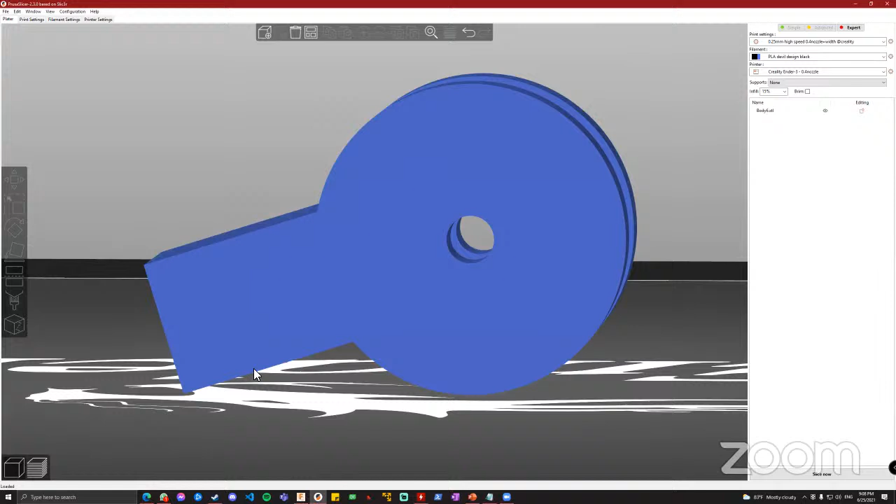If this isn't the case, we can also look at other angles, for example, this one. And this would mean that it has a contact point over here and a contact point on the radius of the thing. Now we want to increase the number of contact points so that it has more support.

So one way to do that is to go and create a sketch right here. Really simple sketch. We should make this tangent. We're going to hit this, the constraints menu. It's the same menu with the sketches, but this deals with constraints between shapes. And we're going to make this line tangent to the circle. We're going to hit E for extrude, select that face,

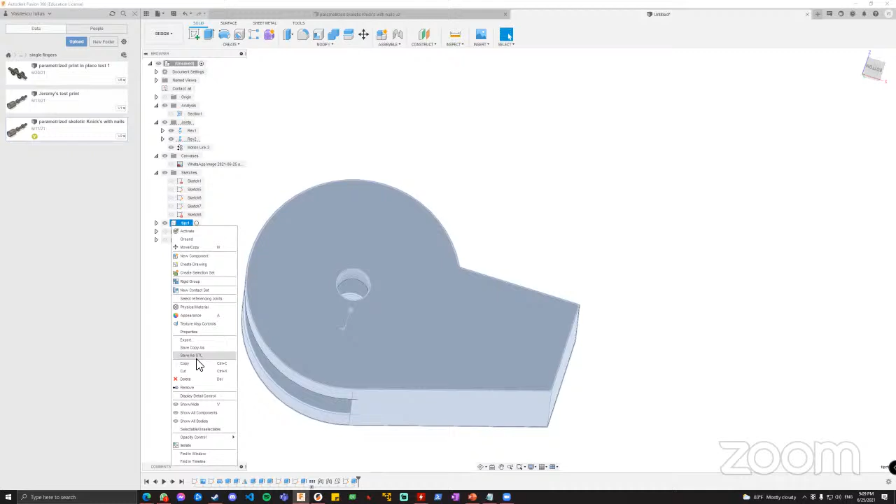and bring it over to the other side. We can now right click on this, save as STL, and this will save the entire component, no matter if it contains one body or more. Hit OK. This is body 6.

And now if we import it alongside, we can angle it again. And when I'm actually slicing, as you can see, much less bridges. I have the bridges, I have the overhang perimeters with blue. And this design right here would require supports.

Well, if you don't mind, I just want to point out one thing here. Another consideration as you're setting up your prints is also going to be thinking about the direction of extrusion. So the way Alexander is showing this is perfectly fine, it's an option, but if you really want to get the maximum strength from this part, because this is a point of stress, I would print this with the circular faces flat side down.

And yes, you would need supports on the inside, but that's no big deal because they break away afterwards. But that way, the direction of the layers, you're going to have full concentric circular layers that are going in the direction of those circular faces, and you'll get better strength on that part as opposed to the layer lines

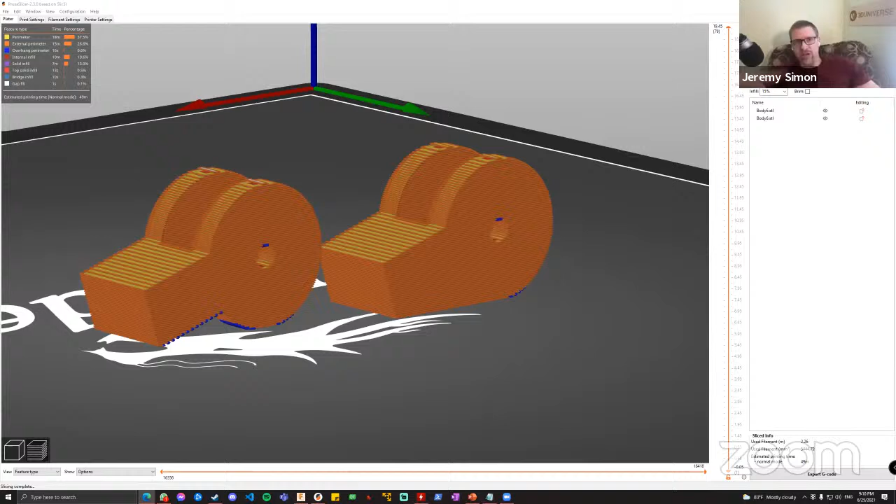going across like they are right now. Right, and this is a completely different level of thinking, really, because this is professional manufacturing.

You have the strain. Let me share this. So you have, this is how it would look in a cross section. You have the layers right here. And if you pull the layers from the tips of them, it's going to be just fine. You're going to have the maximum amount of force that the material can take.

However, if you try to pull the layers apart, the layers aren't perfectly bound together. And that's part of the 3D printing technology that you have to understand when you start doing more professional work. And because they're not bound together perfectly, it means it's easier to pull apart one layer from the next one than to completely rip open a certain layer.

It's a difference of how the tensions are held at this point. And as Jeremy said, when you have holes like this and the pin is supposed to be sitting off like that, you can have the pin's exerted force going upwards, which will completely delaminate these layers and break the piece open.

Right. Any other major questions?

So I have a question for you, Alexander, with regards to modeling. So a lot of the models are STLs. Are you able to pull in an STL to create a CAD model?

Yes, let me see if I have one on hand. You can insert mesh, and oh, I can actually import my old STL files. The STL files are defined differently from a programming and memory standpoint, so I don't really recommend working on them. Personally, I would rather redo this thing from scratch than use the STL file.

But if you want to use the STL file, when you import it, it's going to be a mesh body. You can right-click, do not capture design history, and convert the mesh to BREP, this option right here. And this is going to convert it to a native Fusion format so that you can do all of your extrusions and fancy sketches on it.

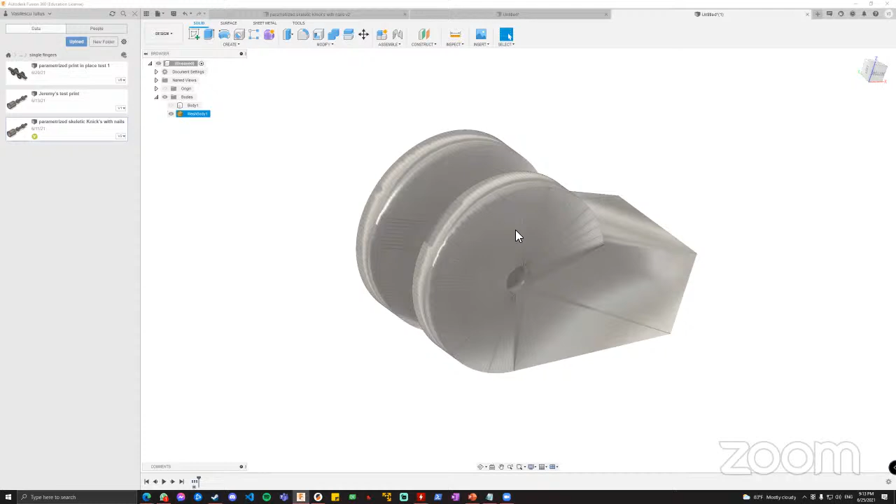I'm going to capture history again. And if we work, for example, on just the mesh body, if I hit extrude, there is no surface defined on it. There are plenty of triangles because that's what an STL file defines, but there is nothing for Fusion to do with this.

Not even body intersections. I think it's important that we make this point clear because this has come up quite a lot and we struggle with this. Essentially, to go back to your question, yes, you can bring in mesh objects as you're seeing here, and you can convert them.

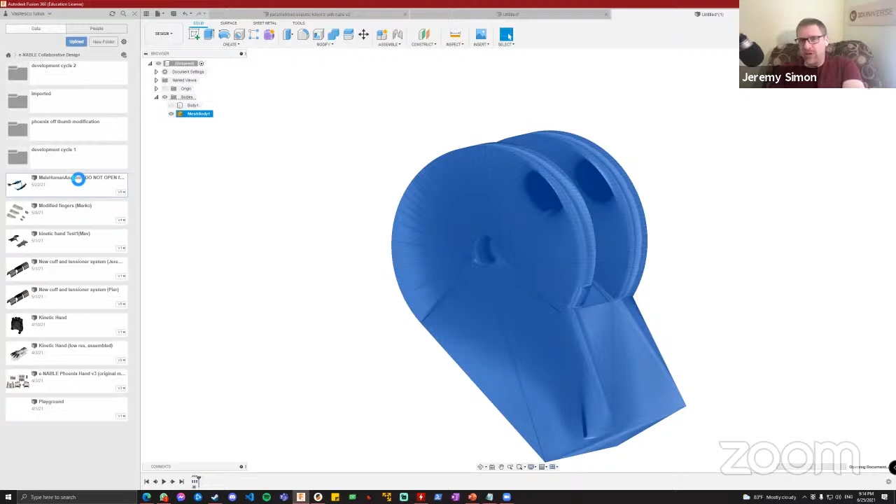Now, if you tried to pull in something more complex like a palm, or some of our fingers even, they have so many facets in the meshes, so many different faces, that when you try to convert them, Fusion can't even handle it. It won't do more than, I don't remember exactly, 10,000 or 12,000 faces or something like that. Not to mention it would be extremely hard to compute anything on it if you did try to convert it.

But even those that you are able to convert, it's going to be very limited, as Alexander was showing, in terms of what you can do. So the best option is always going to be bring in the mesh, just like he did here, but use that only as a reference to then build fresh geometry over it.

So create a new sketch, extrude the sketch, basically build like you're building from scratch, but using this as a reference to build over. There's no clear way to bring it in as if you're working on a CAD file. There are paid tools that claim to do a better job of that, but I haven't found a good free way of doing it. If anyone else has, please share, but I haven't found a good alternative to just building clean, fresh geometry.

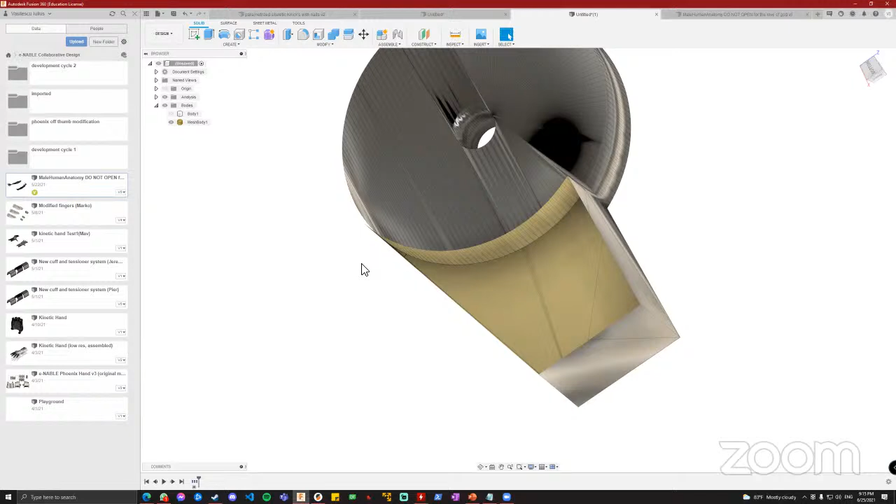Not to mention, when you do that, if you were to build clean geometry over this, you're going to then have that history of everything you're doing as you build it. And like Alexander showed, you can then later go back and make changes or modify it. So you get a lot more functionality in the end than just having a solid body, even if you could do a clean conversion. So there's no way to convert it into a step file or an IGES file and bring it in as a solid model.

Not the way you would want. I mean, you can convert it like he just showed you, but you're going to end up with a whole bunch of these little triangular faces that don't necessarily match up with what you would have created if you had done it as a CAD model. So it's just a lot harder to make this body work, for example — I think it has about 50,000 faces.

Yeah, and that's what I was afraid of. I was just wondering if there was something I was missing in the program. So you confirmed, yeah, it's a real challenge.

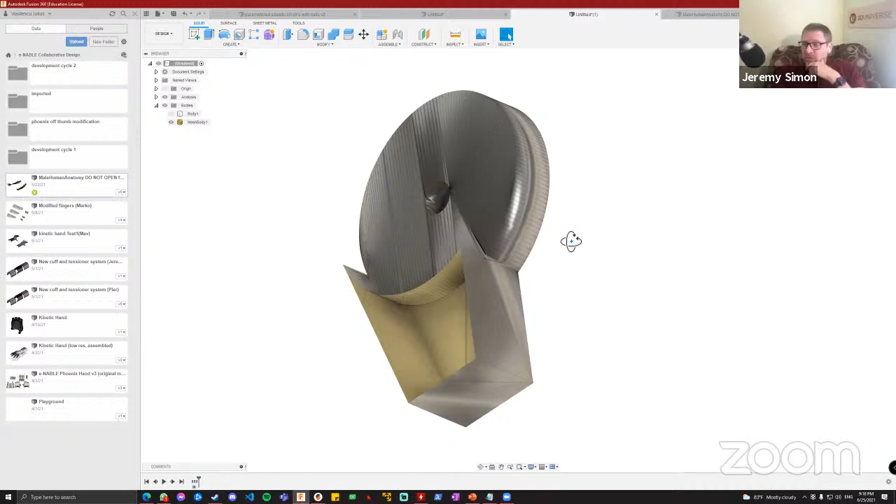We've got some people, like Ward, one of our volunteers, who is actually working on rebuilding one of our designs in Onshape. Hopefully we can get others to do that too — take on a particular design. We're going to have to rebuild them for those that don't have the CAD files available. But then it's something you only have to do once, and then we can share those files, and it'll make it much easier for people to innovate from that.

Perfect. Thank you, guys.

There are also two other issues with importing STL files. Number one is really the reason why you can't use them properly in Fusion 360: an STL file is a giant list of triangles that are supposed to be connected together to form a surface that has an inside and an outside.

Now, because the STL file inherently is supposed to have an engineering error of plus or minus whatever you defined when you exported it from your original software, that also means some of the triangles might not be properly forming a surface. So you're going to have various issues and nooks and crannies within the design.

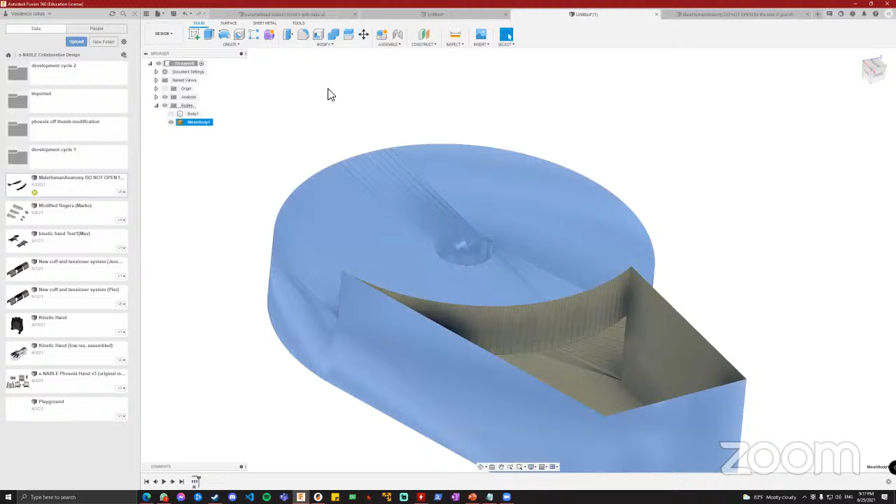There is also — technically speaking, you can work with this surface where I have presented the solid menu and the sketches, but there is also a surface working menu, a sheet metal working menu, and various other tools for either 3D printing or for working with very specific surfaces and biological-looking designs. This is technically a surface, and that's what that symbol means, but that requires very advanced knowledge to actually use.

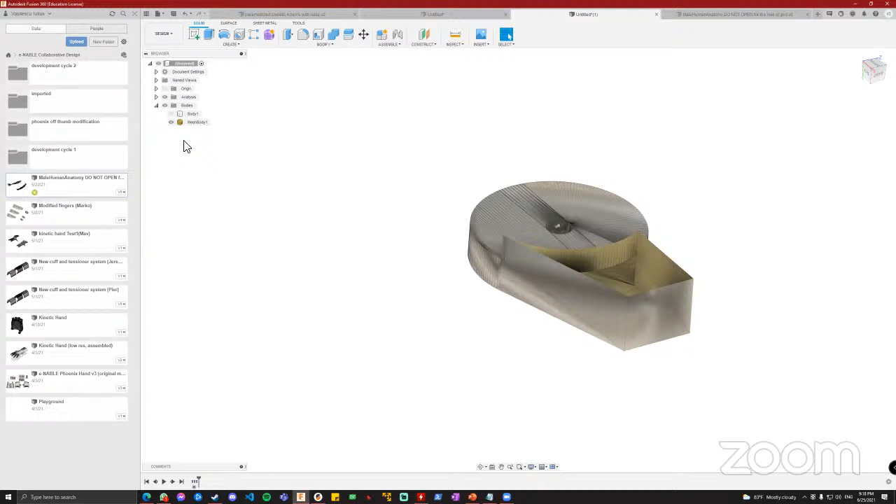The second issue I want to mention is Fusion 360 doesn't use triangles inherently. Fusion 360 uses these sketches and surfaces.

A single surface can be a huge number of points with a huge number of properties. When you try to convert an STL file to a Fusion 360 file, each of those triangles is treated like a world of possibilities. So each triangle in Fusion's mind could actually have a lot of bending, a lot of endpoints, a lot of various properties, which the STL file doesn't actually have, but Fusion thinks it could have.

Because of that, when you import really big STL files, it could crash your computer. For example, I have a beast of a computer, and I imported from a site called Z Anatomy a full body anatomy of a human - skeletal, muscle, skin, plus veins. These are just the hands, and it's already making my computer run really hard. There are a lot of meshes in here, I think about 500.

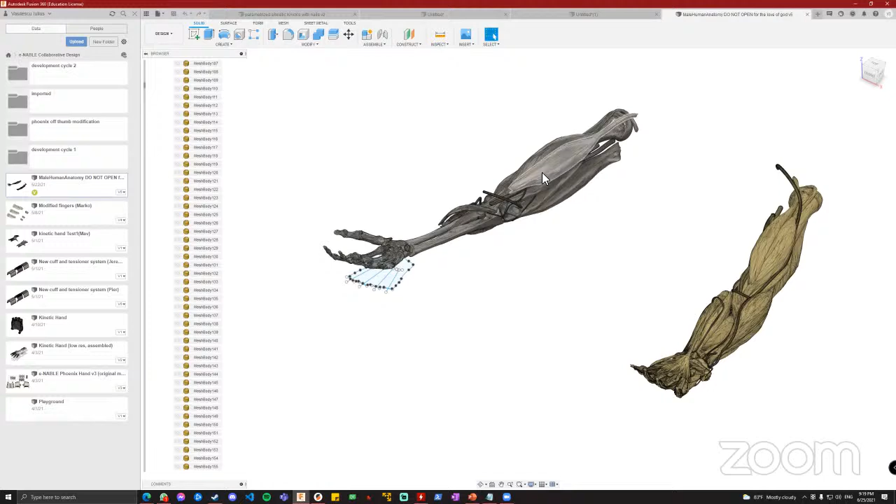If you try to render all of them in Fusion with no options, just move them around, it's probably going to require either a very powerful computer or it's going to crash the entire thing. So with very advanced STL files, you don't want to use them in Fusion 360. You're better off taking pictures of them and using them as such.

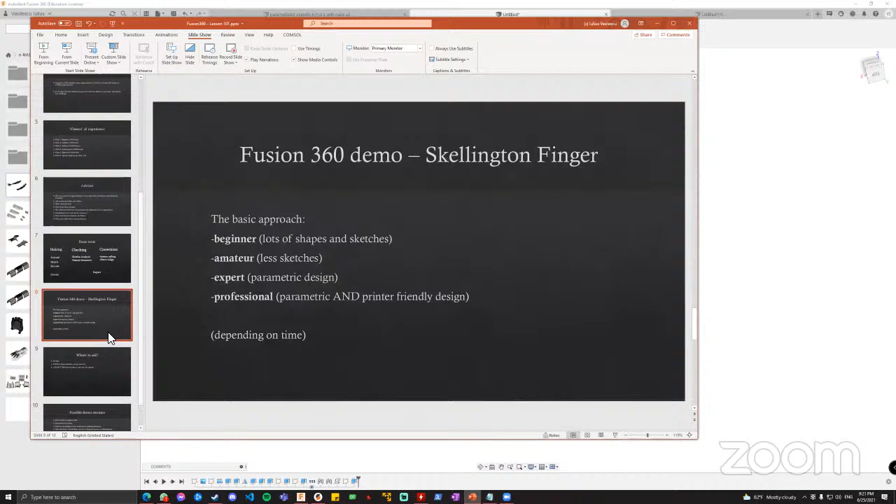It's new, it has a lot of new possibilities, but if you want to ask, they have an official YouTube channel that does, I think, weekly streams with various questions, tutorials, and updates on the software. It has a lot of recent updates.

If you don't like the official channel or feel that's too advanced for you, there are a lot of communities on YouTube that have tutorials, and you just have to choose which one feels most friendly to you. You can also use Google.

There are a lot of forums online that talk about solving various Fusion 360 problems. There are even ones where you can post the Fusion 360 native files, and they can return to you with the fittings. You can also directly ask on the e-NABLE hub.

Me and there are plenty of other probably more skilled engineers on the e-NABLE hub as well, or just have a post on the stream if you don't know who to ask.